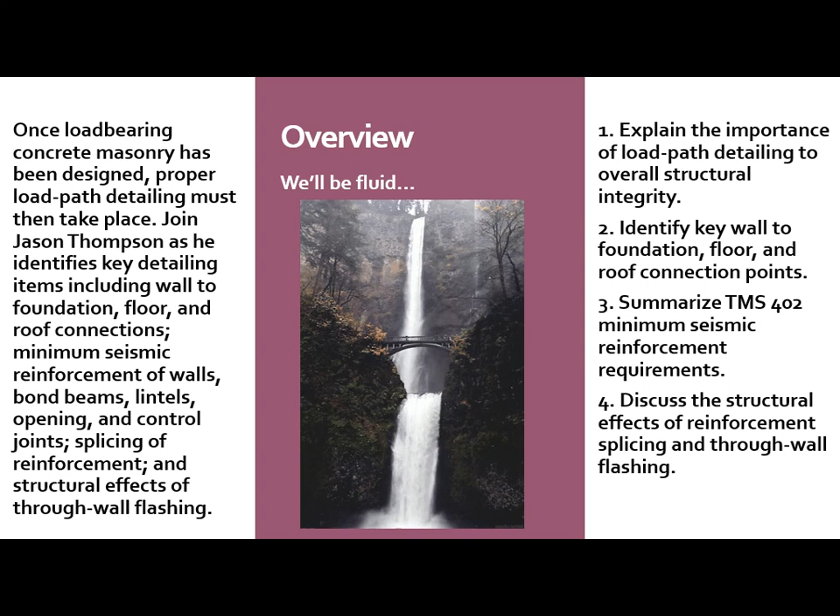And of course, you guys have handout slides and things of that nature. But even though we have a syllabus laid out in front of us, we're keeping things fluid and fairly flexible, because at the end of the day, making sure you guys walk away with the information you need is always the most important task of the day.

So if you do have questions, at any point, shout them out, or if you want, save them to the end like Mr. Albert -- we'll save some time at the end to tackle those questions as well. But don't be shy about raising your hand and asking a question. If it's a hard question, I'll defer to Daryl. If it's an answer I don't know, I'll give you the code word of 'it depends,' and we'll talk about it later.

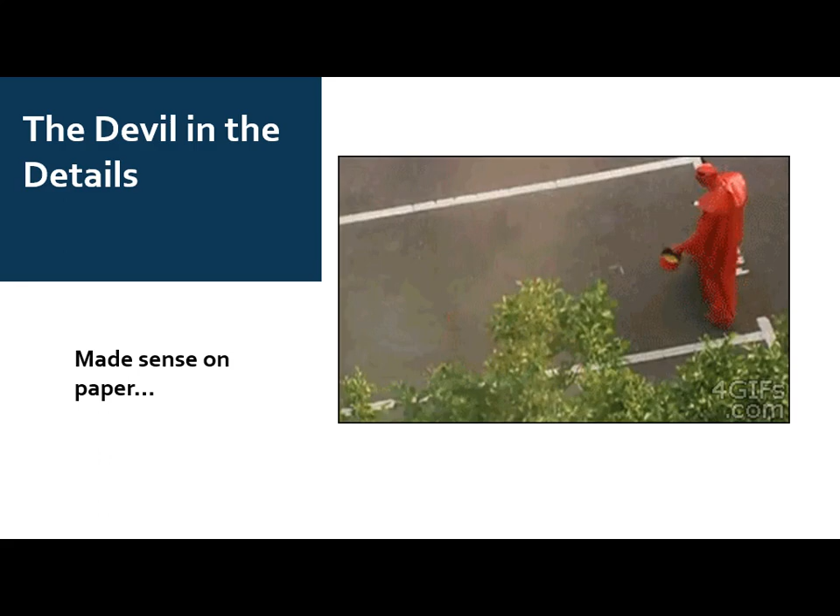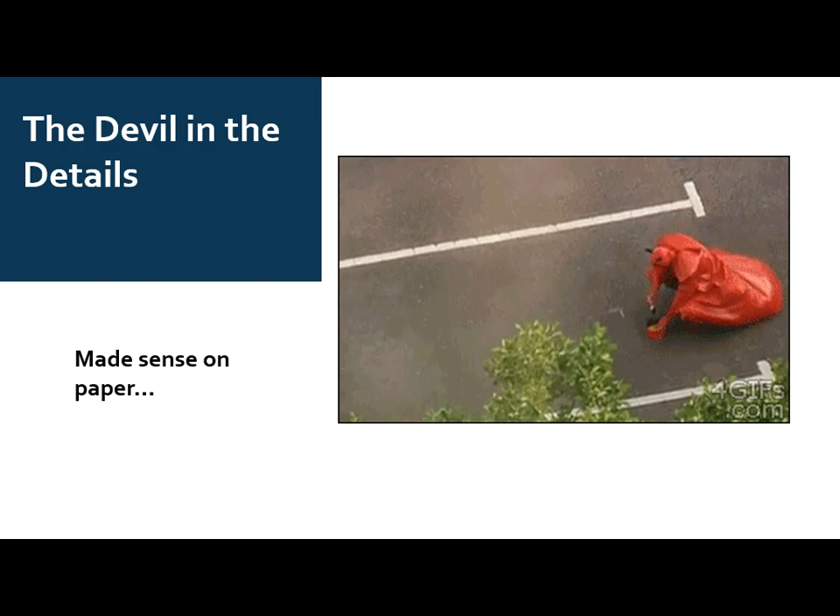Before we get into the specifics of details, I want to talk about bigger picture things. One of the biggest questions I tend to get is, you've got concrete block and concrete, what's the difference and why are there different codes? We'll drill into some of those nuanced details.

My background growing up on the West Coast, I started practicing and cut my teeth on the Uniform Building Code. For me, detailing practices for masonry were always centered around reinforcing steel, because it was UBC country, higher seismic. As a result, the concepts around unreinforced masonry were foreign to me until I moved to the East Coast and started seeing some of those requirements.

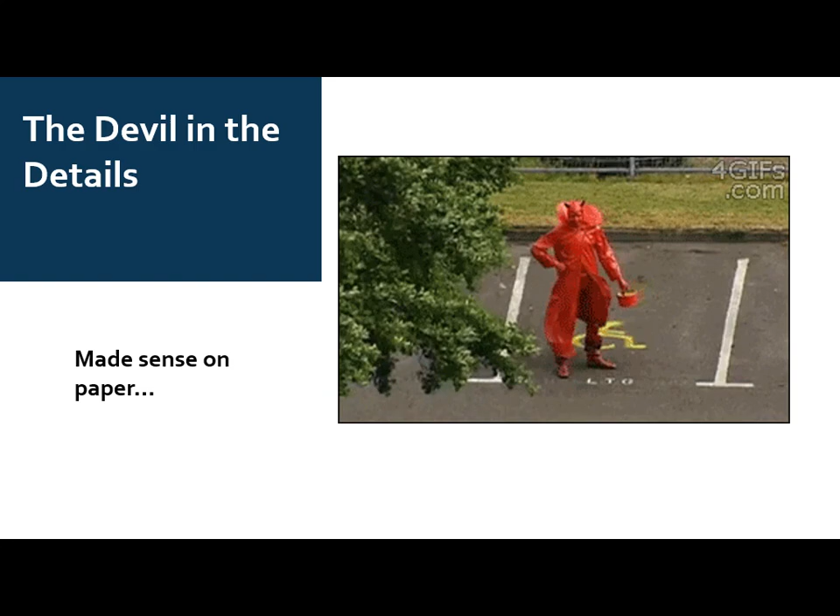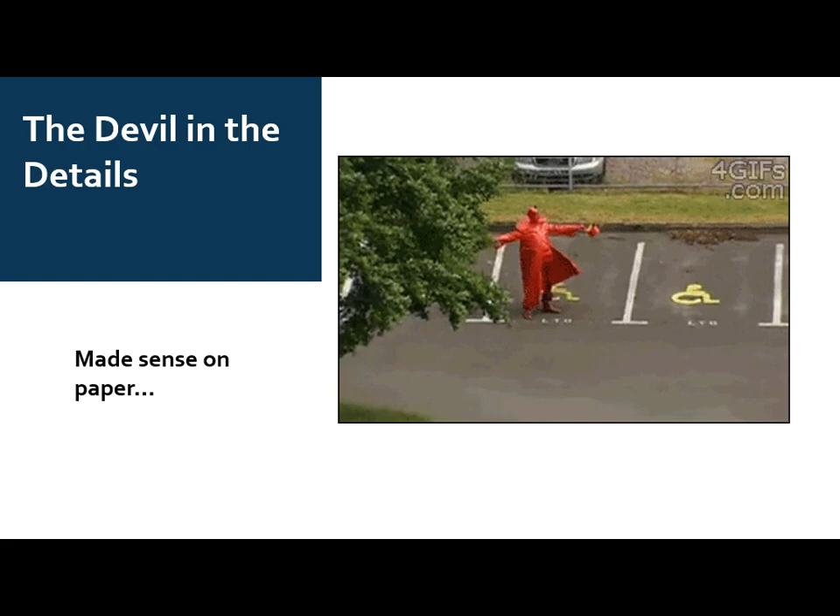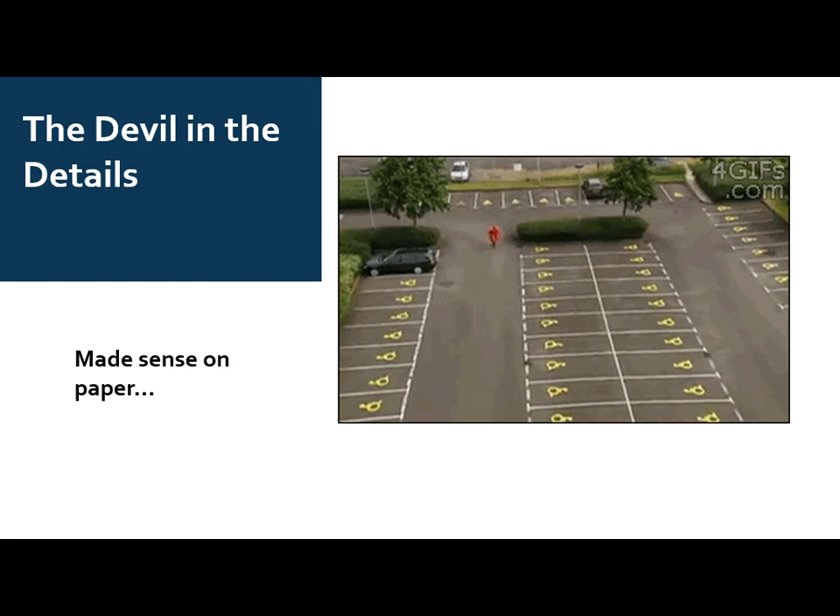When we look at it through the lens of concrete masonry versus concrete, they're both basically concrete, it's cement, aggregate, and water mixed together. The only real material difference is that all concrete block is dry cast, whereas pretty much everything under the reinforced concrete umbrella is wet cast. We could incorporate design provisions into a single standard addressing both, simply by introducing different coefficients or modifications for dry cast versus wet cast concrete. We understand that's true.

But when you look at it from the reinforcing detailing practices, they are a little different. When we're drafting design requirements for masonry, we know there are limitations in terms of practical and feasible construction practices that apply to masonry that don't necessarily apply to concrete. That's one of the underpinning reasons why we have different standards and detailing practices between masonry and concrete, because we just can't do some of the same types of details in concrete block that we can do with reinforced concrete.

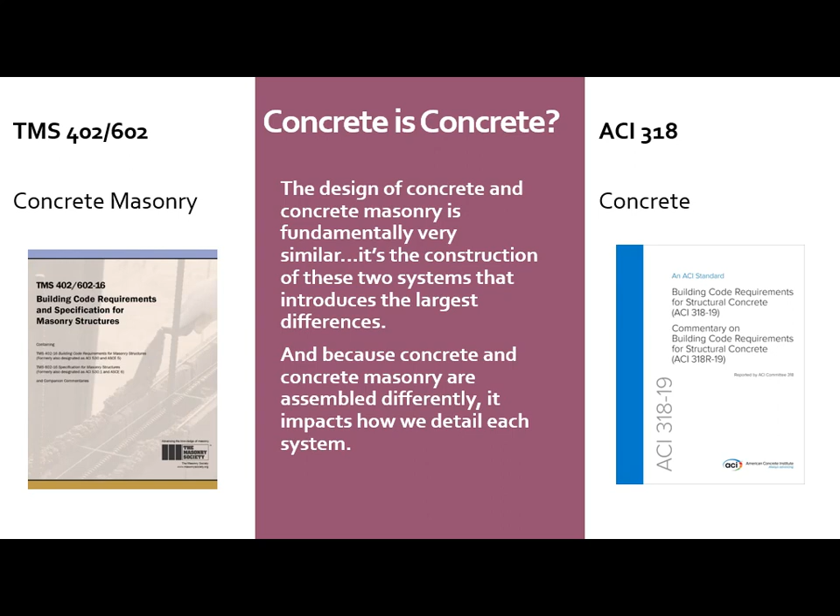So as we draft up the provisions now included in TMS 402, we have that implicitly buried in, acknowledging that yes, we could do certain things, but it's really hard to execute some of those types of details out in the field like you can for reinforced concrete. Because you're dealing with a concrete block, it's basically a stay-in-place form that's also a structural component of the overall assembly.

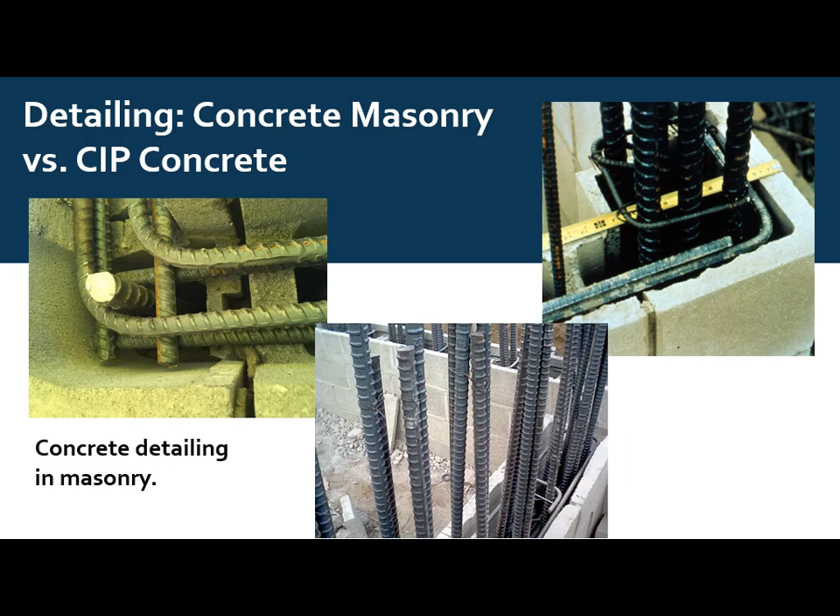Again, it's not that you can't do things like tying your vertical reinforcing steel within a masonry wall, it's just not always practical to do so. We work that into some of the implicit detailing requirements stipulated through TMS 402, as well as some industry recommendations.

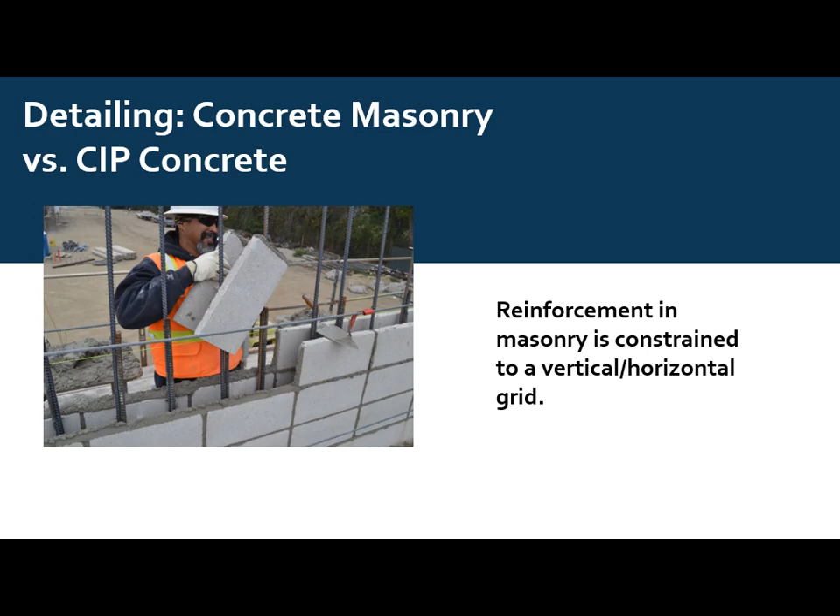I wanted to set that as grounding criteria as we look at some of these details. It's not to say you can't do things even better than what industry practices or TMS 402 would require. It's that there are limitations with masonry construction that you don't necessarily see with reinforced concrete, even though fundamentally they're the same material. We just put them together in a slightly different way, and they get detailed as such moving forward.

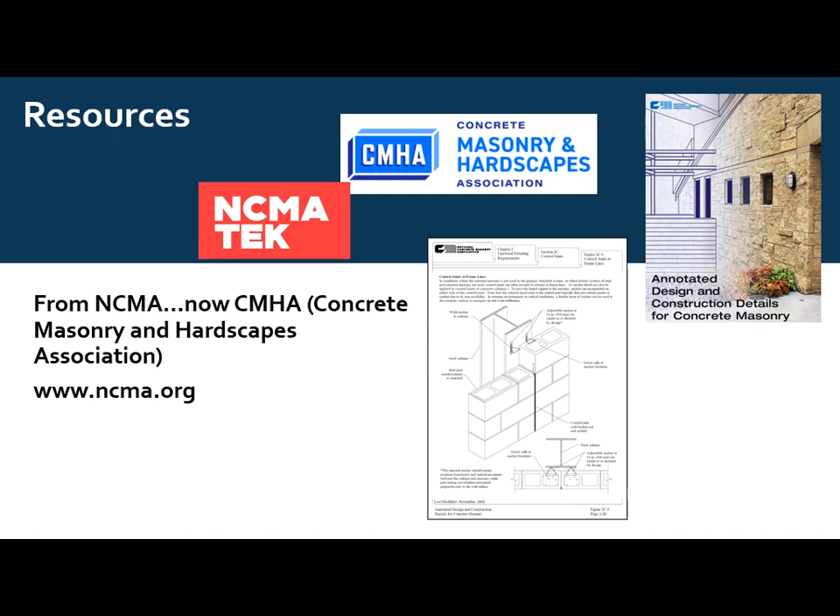In terms of detailing, the one I would probably say is the most comprehensive is their annotated design and construction details. This has hundreds and hundreds of CAD-based, vector-based drawings that you can download and apply. As with any of these details we're going to talk about, they're pretty high level. They don't get into very specific details on a project-by-project basis, because they're not intended to do those types of things.

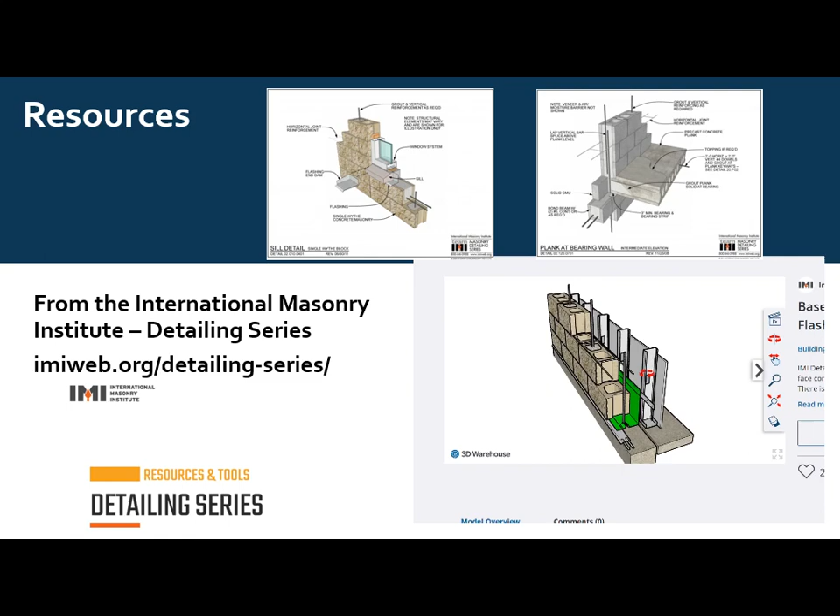The next organization is the International Masonry Institute. You guys may have heard of this group. I bring them up because their details are not vector or CAD based. They do SolidWorks, SketchUp types of things, which I find an advantage from an instructional or teaching perspective when working with younger engineers, because you can go in and look at three-dimensional drawings at lots of different angles. So if you're ever curious how to do a connection or how to meld two different types of materials together, you can rotate things around to look at it in different views, to get a gist of how to apply it to one of your specific details.

The third one, which you may not have heard of because it's north of us from Canada, is the Masonry Institute of British Columbia. They've got a big database very similar to what IMI has. They are all solids based, developed in SketchUp. The one thing I do like about what they have is their navigation tool.

The way they've put together their library of databases is they give you a building, and then places you can click on throughout that whole building, and it will pull up details appropriate to those, whether cross sections or details at roof floor levels, what have you. So it's a lot of the same types of details, but also a different way to interact with it. Depending on what you use in your offices, whether CAD based or Revit based, there are different types of resources out there.

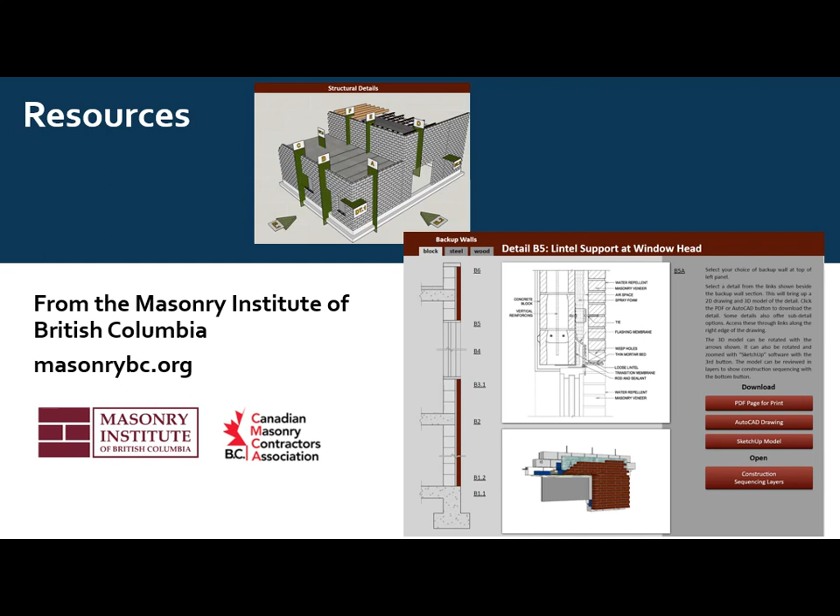Having said that, as we go through some of these things, I'm actually going to pull up some of their details and pick them apart as well. Recognizing that there's lots of different ways to do things, and some of the details out there as industry practice don't always address every little thing, some of those nuances are good examples for us to talk through this afternoon.

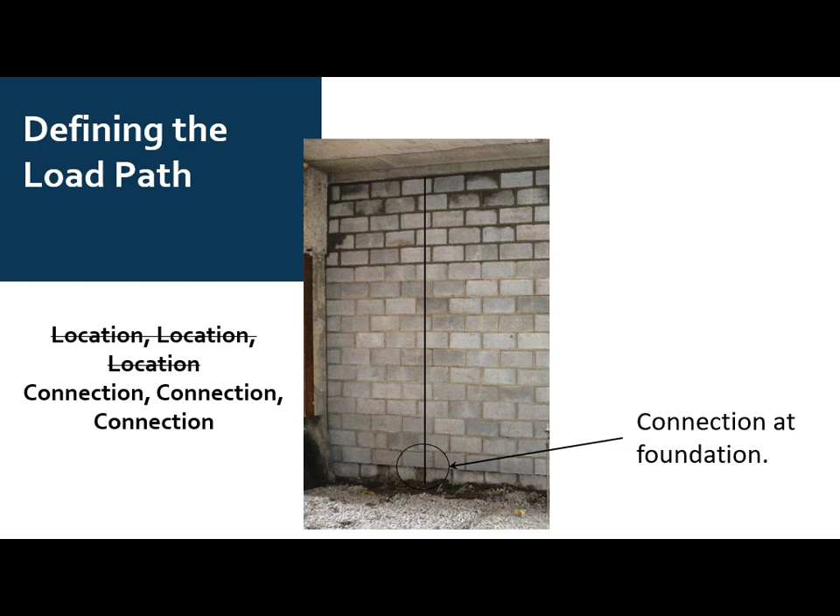So we all know the location. What I'm going to focus on is really the connection component of our load path as it applies to detailing our masonry structures. I'm going to lump it into a few different categories: that base component, that base connection where the masonry wall connects into the footer or foundation below; then work our way up the wall, looking at tolerance placement requirements for the reinforcing steel - not a lot there, but a couple of nuanced things to discuss; and finally, the connection at either the roof or floor level. These are the three areas we'll focus on over the next few slides as we look at maintaining that load path, ensuring our connections are stable, verified, everything else.

Starting with our base, the two primary things I'm going to talk about in terms of their implications on detailing is how we interface or connect to the footer itself. And because it's the base of the wall, the footer-to-wall tends to be that transition between trades - you got a concrete sub versus a mason sub installing the two. That tends to be one of those areas where you have lap splices, mechanical splices, or welded splices - some kind of splicing to maintain that tension tie within your masonry wall.

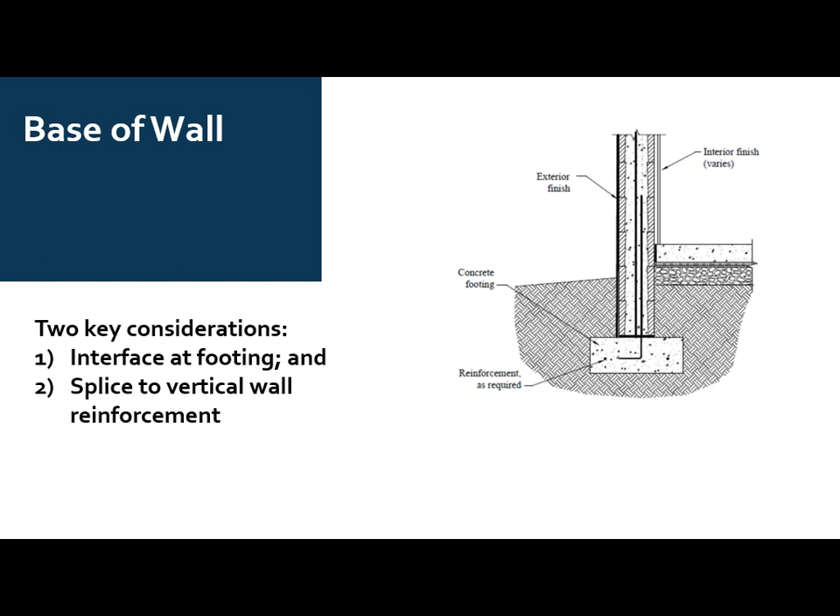Starting with that connection, that dowel at the base, a couple of key things that I tend to see - and this kind of gets back to, sometimes it just tends to be a trade coordination thing more than anything else. The concrete contractor installs the footer, the mason contractor comes in after the fact, and they have to work with the dowels that are existing.

One thing I do tend to see a fair amount is what contractors occasionally call wet sticking. They place the concrete, and come in after the fact to place the reinforcing steel. There's really no code, whether concrete or masonry, that allows for that type of construction practice. I get why it's easier to do, because once the concrete starts to stiffen up, you can drop a rebar in there and it kind of stays in the position you apply it.

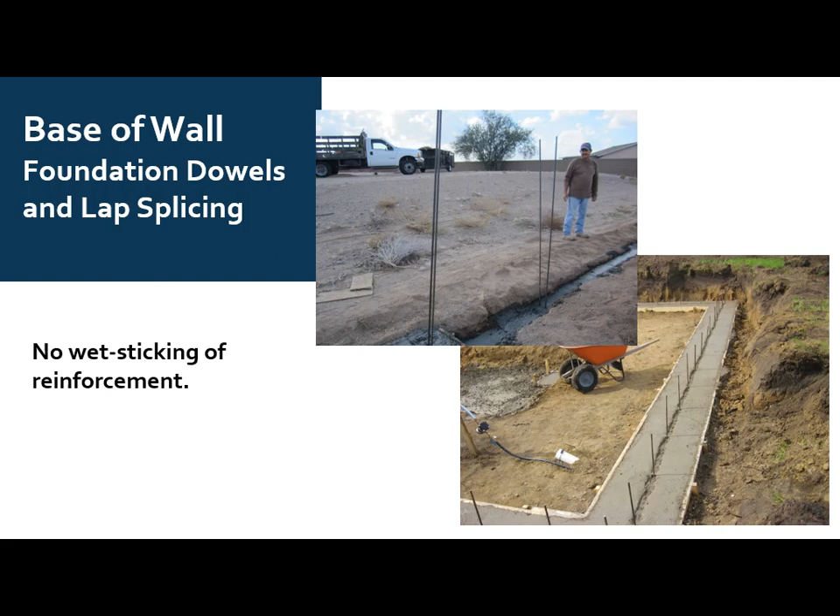We've got to maintain our cover distances around that footer steel, just like we do with the exposed above-grade wall. The bottom picture shows a bit more of that wet sticking. This was a situation where they came in after the fact, and all that toothing you see is where they placed the hook on the bar into the footer itself.

Placement tolerance is obviously another thing you have to worry about. A couple of extreme examples here: one I'd put into the 'I don't care' category, the other obviously had some formwork movement that ends up misaligning those dowels. We'll talk about some details at the end because this stuff does happen. When you run across these situations, TMS 402-602 for masonry does have allowances for how to realign things once they're set in place, specifically looking at dowels coming up out of a footer or foundation into the masonry wall.

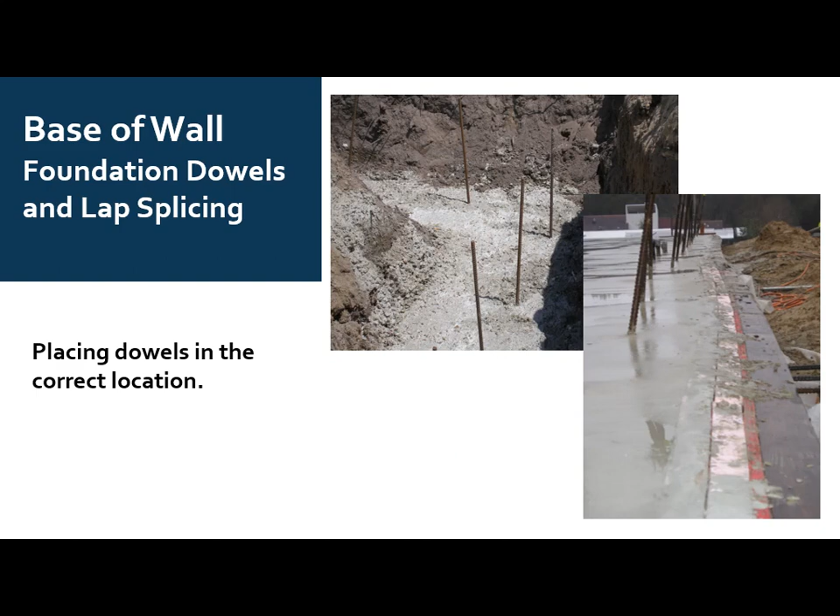With our load path, it obviously all starts with the foundation, that's where we begin, and we move all the way up to the top of the wall. So ensuring that connection is a critical part for us.

For splicing in general, we can lap splice, do mechanical splicing, or weld. For masonry construction, all three of these are permitted options in TMS 402-602. Welding's not all that common, mostly because of access issues. Since your steel is already inside the masonry wall, even if it hasn't been grouted, getting access to weld two rebars together tends to be complicated, but it is permitted. The only caveat is that if you weld reinforcing steel, you must use A706 rebar, because otherwise you can potentially embrittle the steel and lose strength or ductility with lower alloy steels.

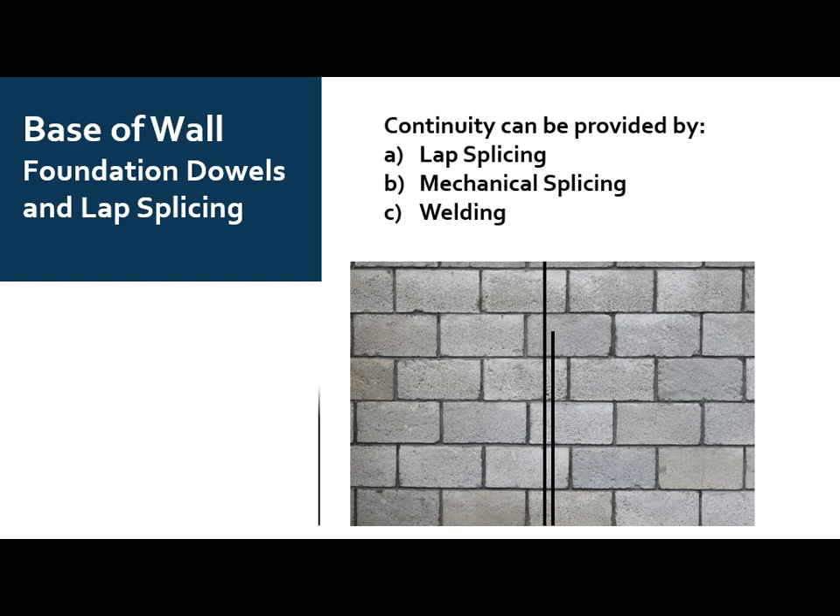Mechanical splices are certainly an option. They tend to be more expensive depending on how much steel you're reducing by removing the laps, though sometimes they're a good choice for reducing congestion within your cells. The caveat on mechanical splices is there are many different types, and just like concrete, masonry has various rebar splice types, some of which aren't necessarily a true structural mechanical connection. They will tie two bars together but may not develop the full yield strength, or 125% or 140% of the reinforcing steel strength. So pay attention to what type of mechanical splice you're using, since they're rated for different load transfer depending on their intended application. What I'm going to focus on more is the lap splicing side of the equation.

So we got a dowel that comes up out of the footer, and it's going to be lapped with the vertical bar in the wall.

Now, years and years ago, if you guys have been practicing long enough, TMS used to have a requirement that basically said for masonry, we lap our reinforcing bars 48 bar diameters. Really easy to apply. Everyone remembered it. It didn't change a whole lot depending upon all the variables that can come into a project.

But we also recognized it wasn't the best solution because it doesn't take into account things like strength of masonry. We know strength of masonry is going to influence the lap splice strength and performance. It doesn't take into account things like this K, this cover distance, which influences this lap strength and performance.

So long to short, we ended up with a new design equation for lap splices going back 15, 20 years now, that has, and I'm going to kind of refer to these gamma factors, and we're going to circle back to those, but think of these gamma factors as bar coefficients. As the bar size gets bigger, the lap splice has to go exponentially bigger.

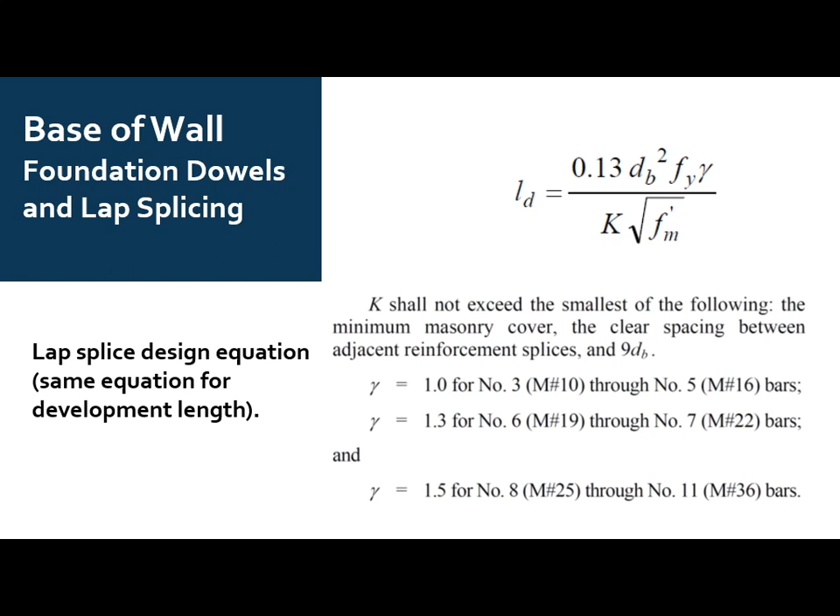We could do that with a more complicated equation, but it was a simpler way to just say, let's introduce these gamma factors. For small bars, gamma's 1. As our bar size gets larger and larger, that gamma gets larger and larger as well.

Now, relatively new is the introduction of this xi factor, this confinement factor for lap splice and development length. In essence, if you're familiar with detailing for concrete, it's a very similar type of detail. When we test these laps, there are lots of different ways you can load reinforced masonry or reinforced concrete. You can load it in flexure.

The worst case scenario is obviously we're loading our masonry elements in direct tension, right? So any lap goes into direct tension. And that's really what all the testing that predicated these details, these equations, was based upon.

What this confinement factor does is if we have any reinforcing steel running transverse to our laps, it will actually confine our lap and give us more strength, better performance as a result.

The one issue, without getting into the nuts and bolts of running through actual calculations, when people plug numbers into this equation for this confinement factor, the xi factor, what you'll quickly notice is it gets very, very small, very fast. So in other words, this number, even using conventional 5, 6, 7, 8 number bars, will go to zero very, very quickly. And a lot of times designers, when they first run through these equations, their question is, I must be doing something wrong, because all of a sudden my lap splice goes to zero very quickly.

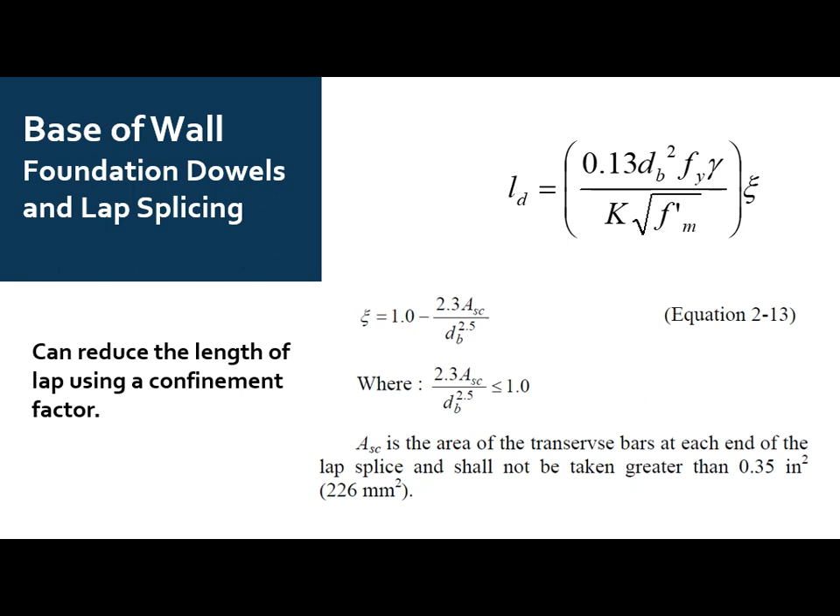And that's actually how it's intended to work. A little bit of confining steel goes a long, long way in terms of how these elements perform. The best way to visualize this is what this confinement steel does, this horizontal, or it could be vertical, it's just any steel that runs perpendicular to your lap.

So when we load these laps in tension, literally pulling on the laps so that we're trying to pull them apart, what we end up seeing is there's several different ways in which a lap splice could fail. We could literally neck down and yield and fracture the reinforcing steel. That's obviously not a masonry limitation, that's a steel limitation.

We could literally just pull the bar straight out of the grout, so what we're left with is just a smooth bored hole in the grout itself. Or more predominantly, we end up doing what's called a longitudinal split. So down the length of the lap, a crack will start to form and propagate out to the exterior surface of the masonry. And once that crack hits the exterior surface, there's no more grout confining or holding the lap splice, and so it splits apart, lets the lap go, and the lap releases. So at that point it fails.

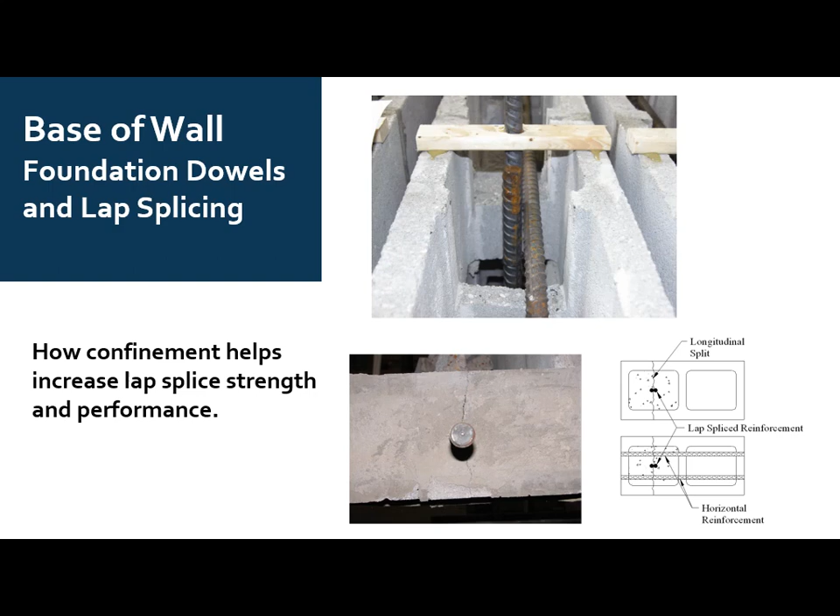What you see here on the bottom photo, that's actually looking directly down the axis of a lapped bar. So this is the end of a lapped bar, and you can kind of see these cracks just starting to form. This was a test specimen at impending failure, showing that mechanism that develops this longitudinal split. So long and short, with our confinement factor, we can add steel in. It can reduce our lap lengths, but as we'll talk about, there's pros and cons and a big caveat on where and how you want to actually use those details.

The reason is, as we'll talk about here in a second, there's actually a minimum lap length associated with this confining steel to ensure we don't have that pull-out failure mechanism. We don't want to have that smooth bore just left in the masonry grout after you load up the reinforcing steel.

The other sort of caveats or conditions on this, out of the TMS 402, is for this confining steel, we can add some, and a little bit goes a long ways, but there's a limitation. There's a cap on how much confining steel we can use, how much is effective. So there's a limitation on that horizontal bar in this picture. It can't be, at least in terms of the calculations, taken larger than 0.35 square inches. So if for whatever reason we had a number 9 bar in our horizontal bond beams, you could put the number 9 bar in there, but the area of steel you use in calculating the confinement effects can't exceed 0.35. That's really sort of research-based to say at some point you just sort of cap out on how effective that confining steel is.

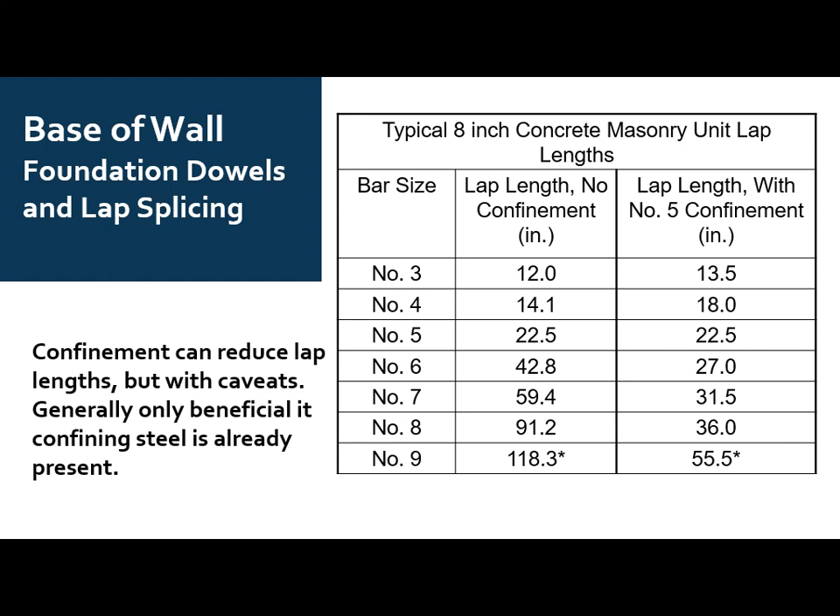And as I alluded to before when we looked at the numbers in that previous slide, our minimum lap length can't be less than 36 bar diameters, which is why we see things bump up for these small bars. There's that requirement of 36 db that kicks in for these small bars, because otherwise you'd end up with something even smaller than that. And what that 36 db is intended to preclude is that pull-out failure. We don't want a bond failure by having such a short lap length. It just basically debonds from the grout, and you're just left with a smooth bar or a smooth hole in the middle.

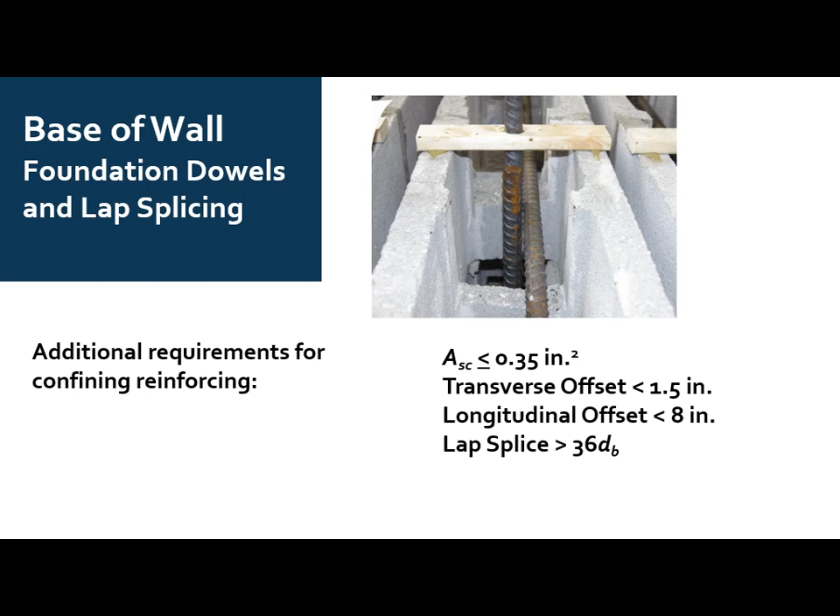So, oh yes, we have a Maxima, a gray vehicle blocking Lindbergh driveway. Anybody know that's your vehicle? Gray Maxima? All right, thank you. Speak up now, because it might not be out there when you go wrap up, right?

So when we start talking about lap splices, there's a couple of big caveats I kept alluding to. They do help, especially when you've got big bars that you're lapping. But my general recommendation is to only use them if you've already got the bond beams in your wall. If you crunch the numbers, adding extra horizontal steel just to reduce your lap lengths a little doesn't help much. You'd end up using more horizontal steel than what you save on lap splices in the long term, and they become more complicated to construct.

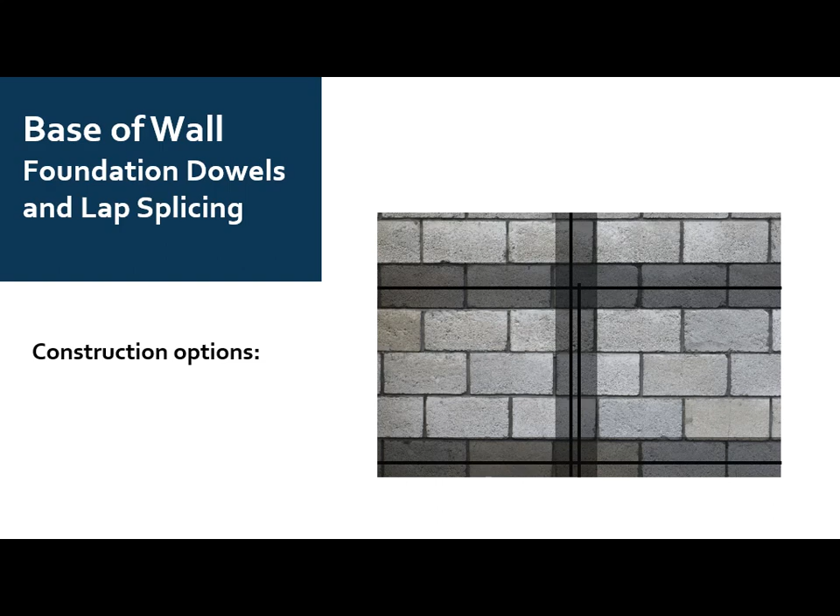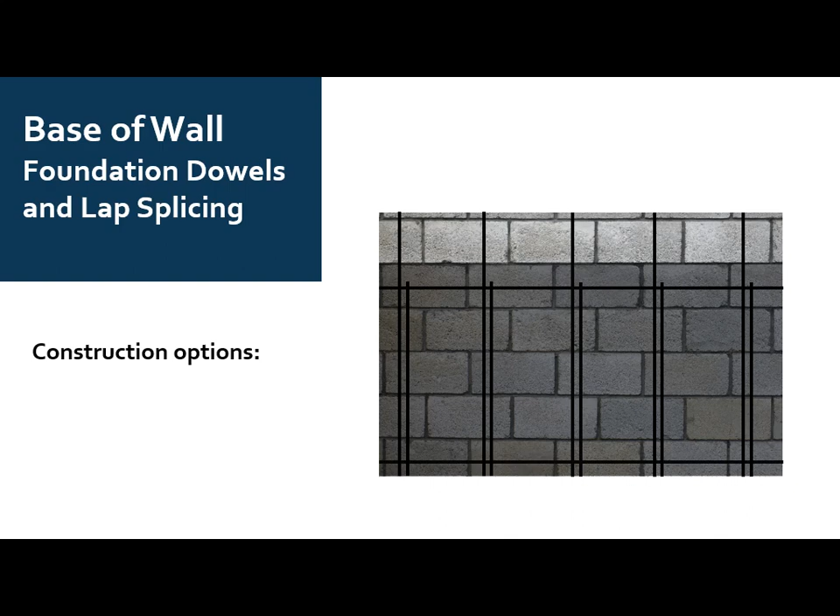Now if you do have something that's going to be likely solid grouted, so either your vertical steel is very closely spaced together and you're going to end up solid grouting anyways, then you might want to look at incorporating those horizontal bond beams if it makes sense to reduce those lap splices, because you're just going to end up solid grouting everything anyway. So it depends on what types of applications, whether you're solid grouted, partially grouted, whether that horizontal steel in the bond beams is already there. If you've got a special reinforced shear wall with bond beams every 4 feet regardless, you might as well take advantage of them.

So having said all that, I'm going to shift gears a little bit and talk about alternatives to all those types of things. One of the things we're starting to see more and more across the country is just different unit configurations.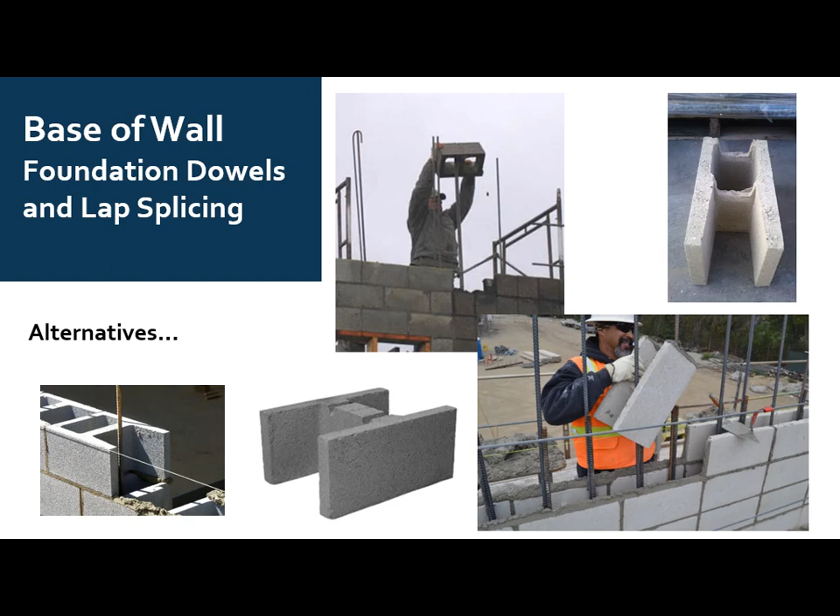So there's actually some other benefits of reducing the number of webs, because you reduce the thermal bridging. That gives you higher R values. So there's secondary effects associated with it.

I've got it focusing on the structural side and the detailing side of things. One of the benefits I really like about these reduced web units is you remove one of the webs, you open up the inside of that wall considerably.

So what you see here is a couple different wall assemblies that just have the outside face shell removed. The one on the upper right is a typical 3-web, 2-cell unit. The one on the lower left is a 2-web unit. We've just taken one of those webs out, but you can see how much more it opens things up. From an engineering perspective, that gives me a lot more confidence in terms of when I detail and put steel in it. It's still up to the mason contractor to ensure that the grout gets placed and consolidated correctly, and having that open area to be able to do that is certainly more advantageous.

There's also other things, Diana reminded me, there's different types of format units being introduced. Everything I've got up here is the standard 8x8x16. But there's other unit configurations being introduced, like the 8x8x32, twice as long. It does require mechanically assisted installation devices, but a lot of that technology is being introduced more into the field. All these details we're talking about are really independent of the unit configuration. You don't design these units any differently or detail them any differently. They're just more to facilitate the construction end of the equation.

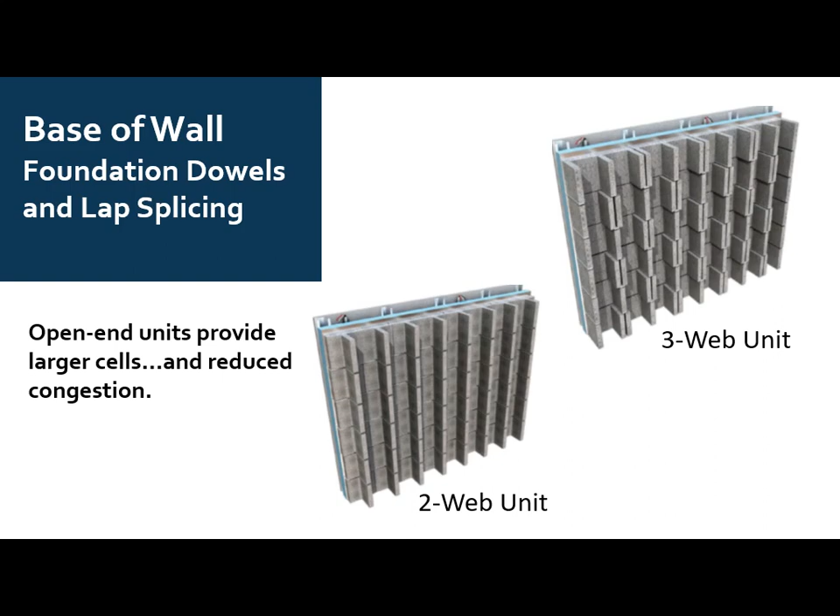So staying at the base of our wall, and if you guys have questions, stop me, otherwise I'll just keep going. I'm going to start off by saying these are bad details, okay? So don't take pictures, don't go back and try to implement these details, okay?

But I had to go digging around. You guys may have seen these before. These are actually out of some NCMA tech notes, and if you looked online hard enough, you could probably still find them out there. But they illustrate the example we're going to talk about next at the base of our walls.

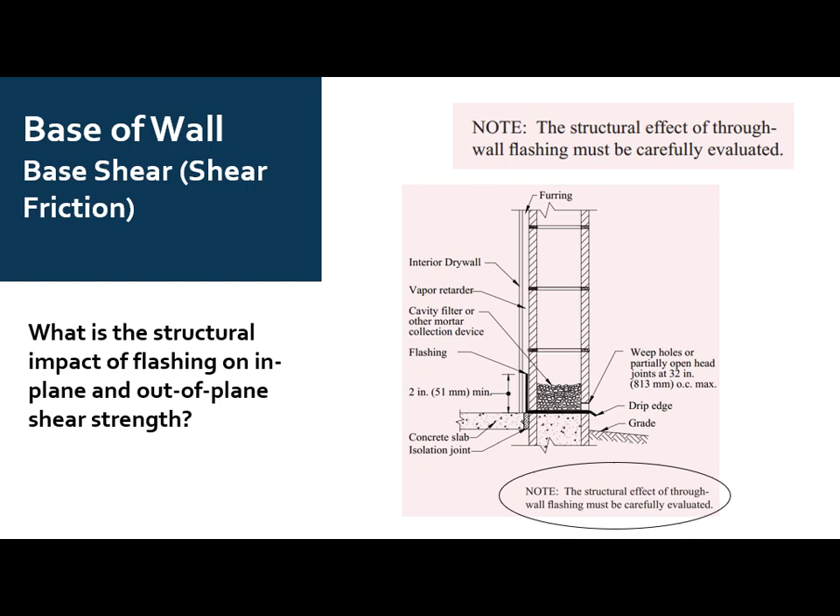Which is, when we incorporate flashing at the base of our walls, what does that do to us structurally? We're relying upon some sort of stress transfer between the upper wall and the base, and if we don't have anything crossing that flashing, we've functionally just put base isolation into our walls to some degree. When you look at some of these old details from NCMA, they have these notes saying, wow, you got to check this out, because there wasn't a whole lot of research or other options out there to definitively give guidance as to how to address this type of issue. We kind of suspected there was something going on, but we didn't have good data to say here's how you actually go about fixing this issue where you've got flashing at the base of the wall.

Today, we do. So these are some old NCMA details that tried to work around really complicated ways of maintaining some sort of load path across these flashing locations. It's kind of hard to see, but there's these stepped flashings, and you have these weird joints, and I'm sure the mason contractors love building these types of things. Long story short, this was the stopgap solution until some research was available that said how do we detail or design around this confidently, knowing that we still need to maintain our load path.

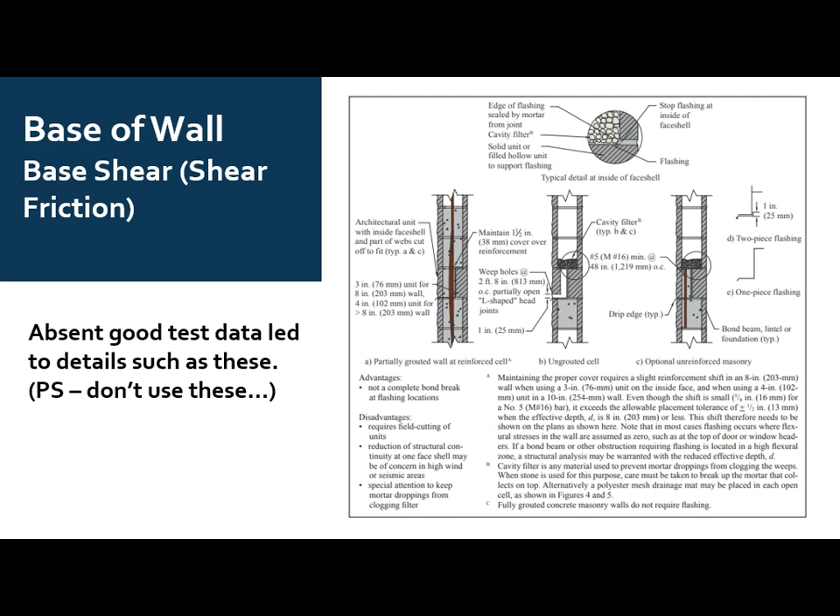Back in the 2016 edition of TMS 402, going back a couple cycles now, they introduced what we refer to as shear friction provisions. So regardless of what that interface material is, there are provisions now for how to detail, design, or check to make sure you've got enough shear transfer mechanism crossing that flashing plane. What you see here is really based upon two different coefficients. I'll talk a little about these equations, but essentially there's a frictional coefficient included. It's 1 if it's masonry on concrete, basically, and 0.7 for pretty much everything else. That 'pretty much everything else' is intentionally intended to be pretty much everything else, recognizing that there's lots of different types of flashing.

There's metal flashings, EPDMs, self-sticks, and all those different types of flashings. This number we recognize as being a pretty conservative low value because we want it to apply to kind of everything. There could be some scenarios where it should be 0.8 or 0.9, but at this point we're basically saying it's 0.7 for pretty much everything else.

Now with shear walls, let's say we're checking the in-plane strength of our shear walls. There's a couple different checks depending upon this trigger, M over VD, which you can think of as M our overturning moment, V our shear, D the length of our shear wall, as an indirect measurement of the squatness of our shear wall. So as our shear walls get very tall and thin, but not very long, they're going to be flexurally dominated. If our shear walls are short and long, they're going to be shear dominated. For short squat walls, we've got a shear dominated mechanism controlled by this equation. For tall shear walls that are not very long, we end up with a flexurally dominated mechanism. And we do a linear interpolation between the two. So long and short, we now have a design check.

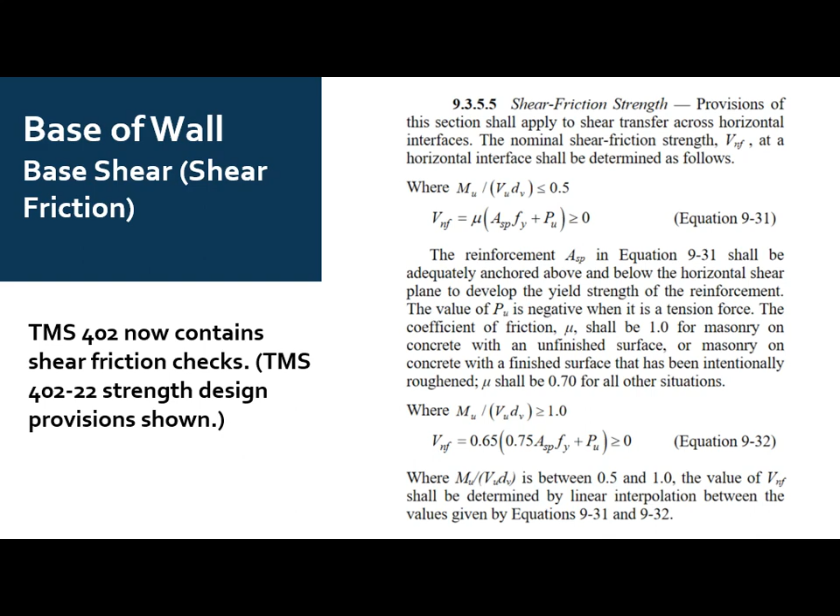One other final thing, as I alluded to before, with foundation dowels, if they don't get placed exactly right, there are a couple of options in TMS 602 that say you can bend and move things around a little bit. So if you've got a dowel that doesn't perfectly align with the vertical reinforcing bar or the cell intended to be vertically reinforced and grouted, you can bend that bar over an inch for every 6 inches of height. There's also an option in 602 for what's called a non-contact lap splice, so physically those bars don't have to be in contact with one another. They can even be in adjacent cells, just not more than 8 inches apart.

This is sort of indirectly related to a question I get occasionally: do you have to wire tie laps together? When the contractor is installing lap splices, do they have to be wire tied? The short answer is, if they have to be wire tied to maintain position for tolerance purposes, sure, wire tie them. The wire tie doesn't actually contribute much to the strength whatsoever. We've tested with and without the wire ties, and it doesn't do a whole lot in terms of adding any additional contribution to the strength or performance of the lap splice.

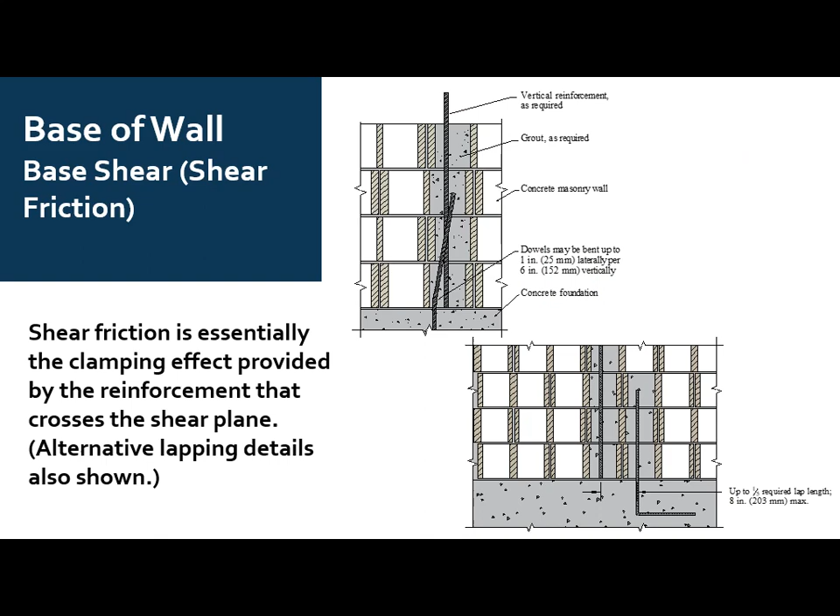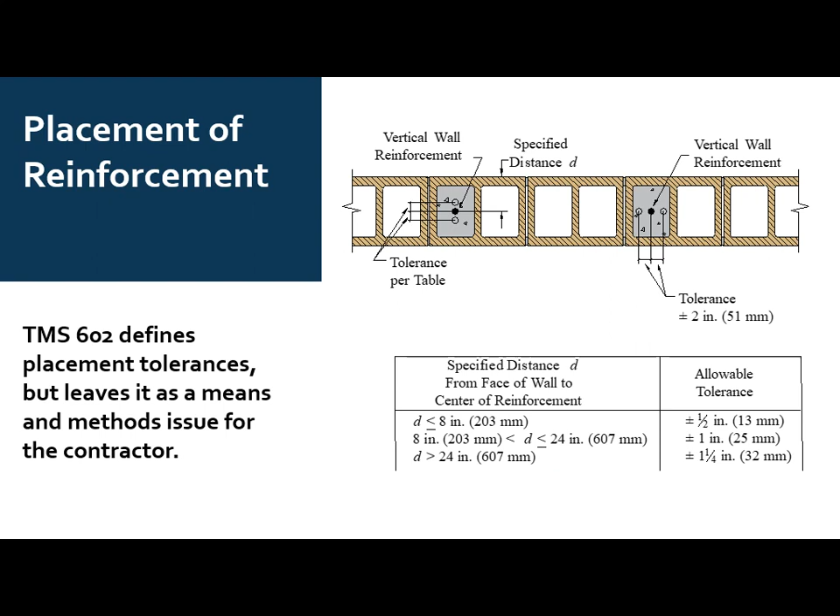Moving up our wall, again the placement stuff, this one's pretty straightforward. There are tolerance requirements for where we place the reinforcing steel, all spelled out within TMS 602. What I really want to talk about is how do we accomplish these tolerances. TMS essentially says here's the tolerances, we don't tell you how to do it. It's kind of deemed to be a means and methods issue through the lens of TMS.

In the past, codes like the Uniform Building Code stipulated you have to use bar positioners every so often over the height of the wall. There's actually a debate on both sides of the fence on the benefits of bar positioners. Certainly they do hold the bar in the correct position, but they also create issues with congestion and potential hang-ups for the grout as you place them. You can talk to different engineers and architects and they have opinions on both sides, which is probably part of why TMS has said, look, we'll leave this up to a means and methods issue. So as a specifier, if you want to include bar positioners because they make you feel comfortable, I think that's fine. If you don't, leave it up to the contractor to figure out the means and methods for themselves.

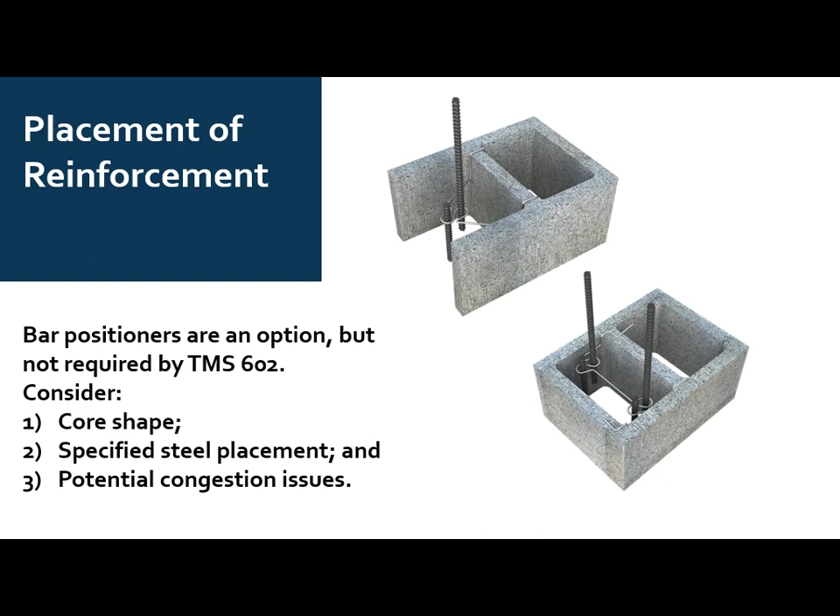The other thing with bar positioners is there are so many different types of bar positioners out there, and so many different types of core configurations for block. They're not always compatible with one another, so that's something else the mason contractor should be sorting through and figuring out.

Moving on up our wall, now we're at our connection at the floor, the roof level. We'll start with the generic stuff of anchors. TMS 402-602 addresses embedded anchors, so bent bars and headed bars are addressed within TMS 402 because they're generic, non-proprietary.

If you do a fair amount of designing anchors embedded in masonry, there's a free spreadsheet you can download through the NCMA website. It has screenshots where the blue cells are inputs, and at the bottom it does all the calculations for you, depending on whether you're doing a ledger connection or top of wall connection.

Now, I personally gravitate a little more towards post-installed anchors, at least for certain types of connections. If I'm doing a wood ledger to a wall, as long as I can get the strength I need out of those post-installed anchors, I lean toward them, because with embedded anchors, the mason has to install them as they go, in the exact right spot, and we all know as-builts and specifieds aren't always the same.

So the post-installs give you a lot more flexibility. Once things are up, they can come in and drill holes, whether you're using wedge, screw, helical, or epoxy anchors. They're proprietary, so a bit more expensive, but you tend to save on labor afterward, and you don't have to readjust things if a bolt gets embedded in the wrong spot and needs to move down the road.

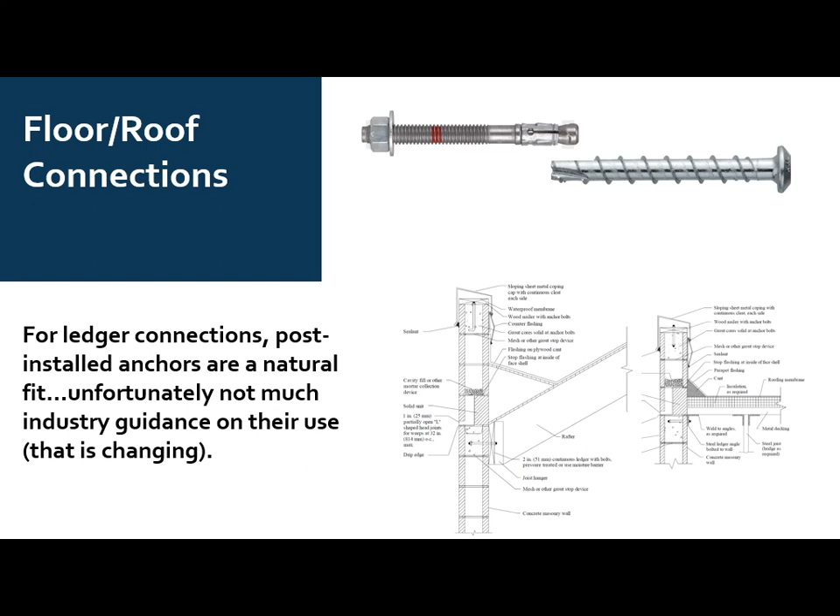Now, they don't work for everything, obviously, but they are a fairly good option.

One thing I wanted to mention, not shown here, with embedded anchors, TMS 402 has two basic options. There's headed, which is typically A307 steel, or bent bar, which is typically A36 steel.

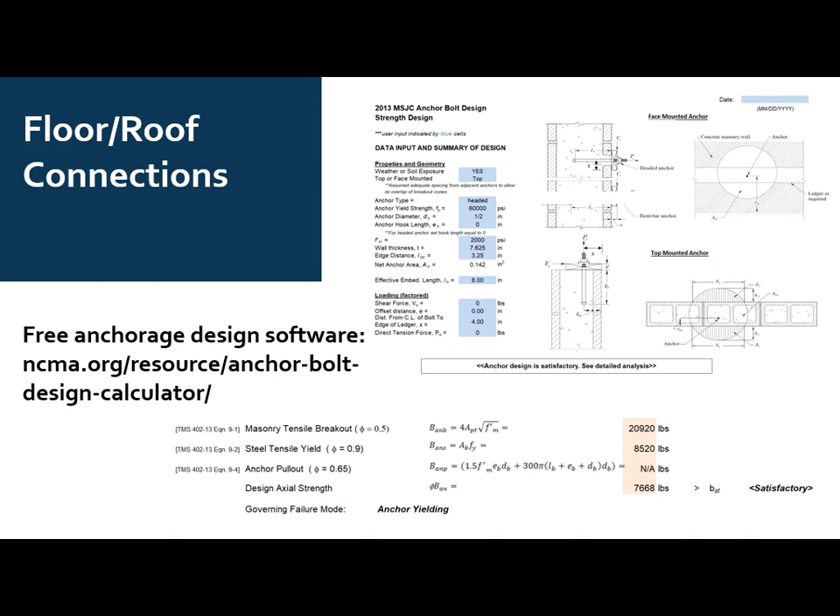If you ever run the numbers, I personally stay away from A36 steel. It's not a bad steel, it's not faulty, it's just a low strength steel. For the exact same anchor size and embedment, you get almost twice the strength with a headed bar versus a bent bar. So if you're looking to economize on strength and performance, headed bars tend to be the better option.

So this is where I'm going to pull up some of those details I referred to earlier in the resources section, and talk about specifics associated with those that aren't problematic, just something to consider as you're putting together these details in practice.

The first one is looking at how we do the bearing connection of a plank to a masonry wall. Most of the details you'll see out there have the plank bear on a portion of the wall, with a SOAP or a half unit or solid unit on the exterior to maintain aesthetic continuity if needed. There's still a gap where the vertical reinforcing steel can be continuous and grout can get down past it. It all works out great.

The detail I want to point out is really the plank or slab height. If you've got an 8-inch plank, it works nicely with an 8-inch tall block. If you've got a 10-inch plank, you end up having to notch out some of these units to get everything to fit. All doable, but just something to take into consideration.

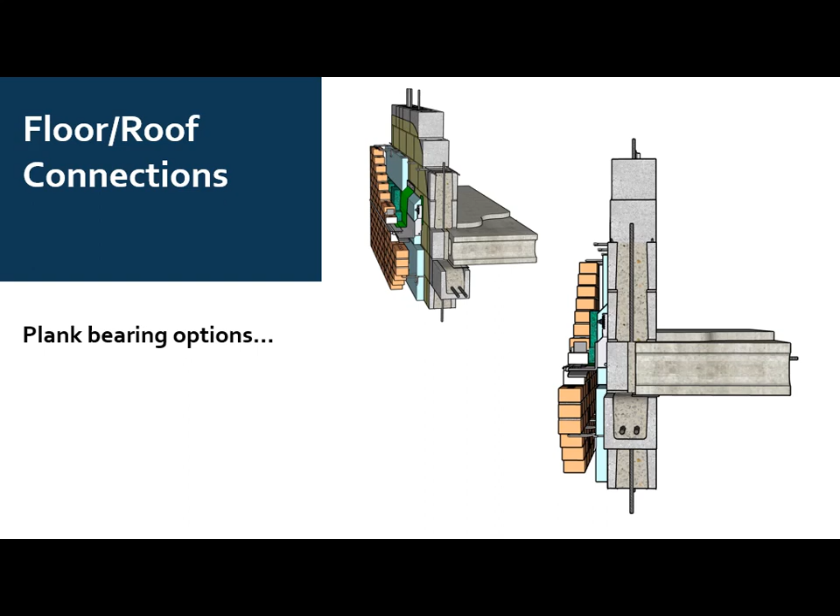Masons are kind of familiar with how to do this. The one that's a little bit more problematic is on the non-bearing side of this detail. This is an issue where I see them drawn, and they look great when they're drawn. They fit exactly into that course in that masonry wall.

But we know that planks oftentimes have camber to them, so where you are at elevation on the ends is not where you are in elevation in the middle. This type of detail, I tend to say, is hard to accomplish, may not be the option for the non-bearing side of your planks, unless maybe you got a really shallow plank, a 6-inch plank or something like that, where you can work with that camber. But these types of details tend to work a little bit better if you got a ledger or something else of that nature.

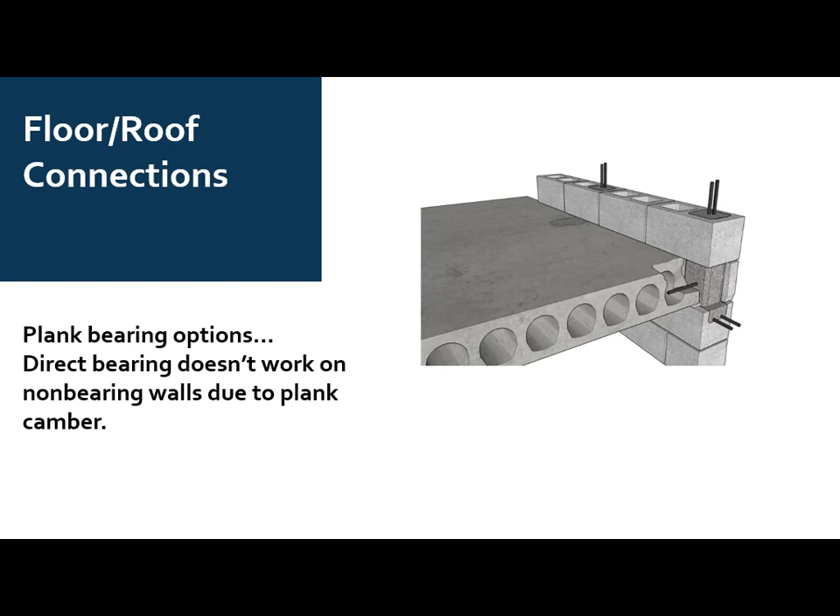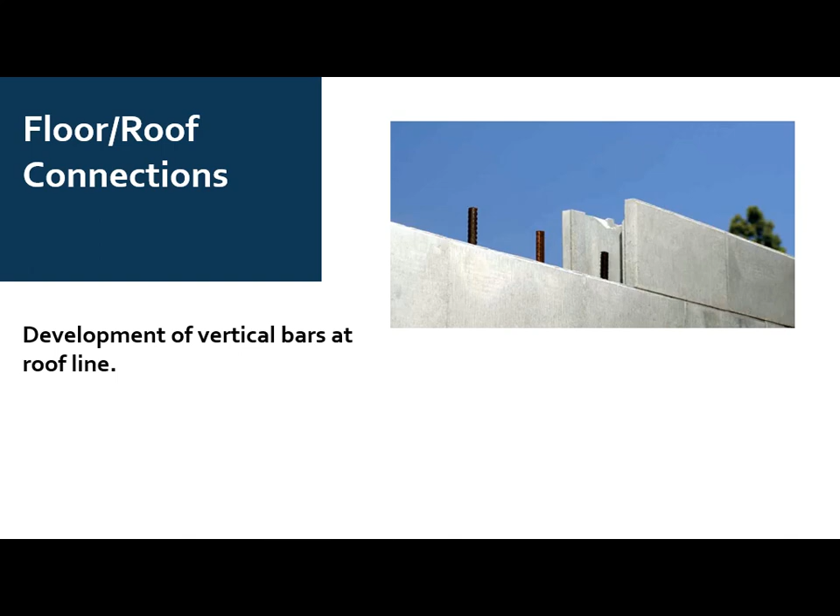Kind of moving or staying at our top of wall, we're connecting again to the roof or the floor line, is how we develop that bar. A lot of that lap splicing that we talked about at the base of the wall is all to be able to develop the full strength of the reinforcing steel that we put into the masonry. We want to be able to accomplish the exact same thing at the top of the wall. So we've got dowels or vertical bars that come up through the wall. How do we tie that into our roof so any wind loads or gravity loads that come in from the roof get transferred appropriately into our masonry and down through to the foundation?

So that standard hook, there's lots of different standard hooks. This is shown as a 90-degree standard hook. Sometimes it's the candy canes, 180 degree, just kind of hooks over that top horizontal bar. But this isn't going to develop, those types of details won't develop our full strength of our reinforcing steel. So the point with this one is standard hooks hook the reinforcing steel, but they don't develop the reinforcing steel. So you don't get the yield strength that you need out of that reinforcing steel.

In order to do that, you actually have to extend that hook out, and it depends, length depends upon the diameter of the bar, a fair amount, maybe 12, 14 inches, to get that full development length, to get the full strength of that reinforcing steel. So any load that comes in, whether it's coming in from the roof, the floor above, down, or up, if we got direct uplift from wind on our roof, for example, we can now fully develop that reinforcing steel.

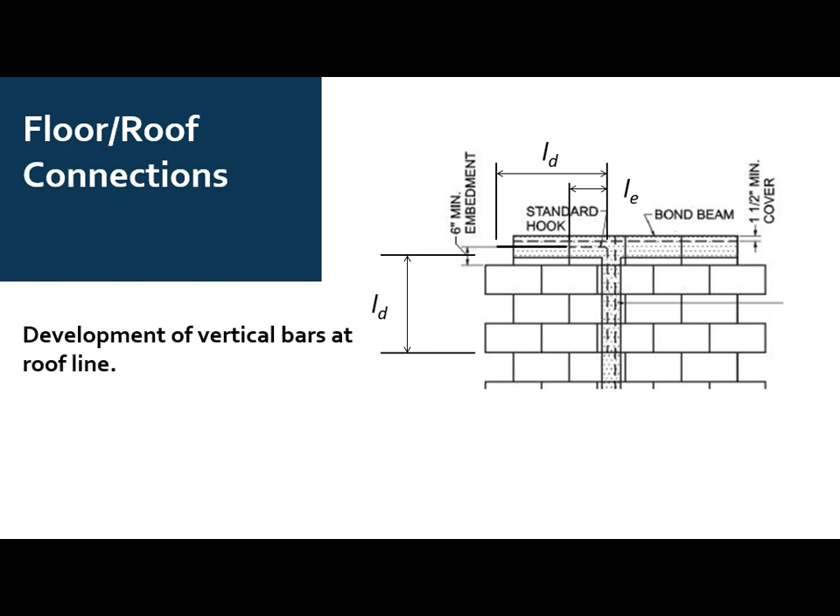Now the rub with these types of details is, as you start to put longer and more hooks in that top course, you're eventually going to start running out of room. I've seen lots of details where you got vertical steel at 16 inches on center, and every one of those bars has a hook, one of those 90-degree hooks on it, and they're just starting to stack up in that top cell. And then, of course, you run into things like this where there's lots of other stuff we're trying to cram into those cells. Pretty soon that electrical conduit's the only thing holding things together for us, and that doesn't work so well.

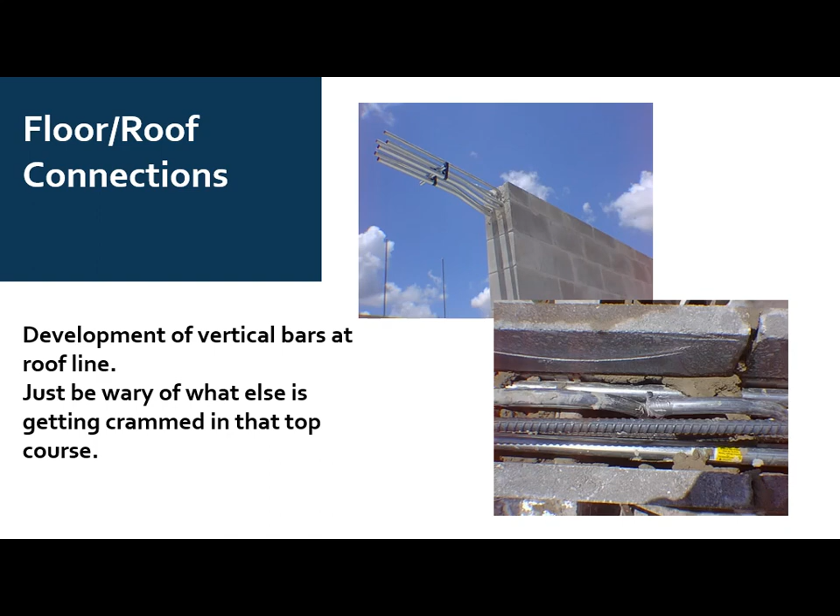So in this particular case, what I'd suggest looking at is, instead of hooking the 90 degree, and instead of just doing a little candy cane that just barely hooks over the top vertical steel, you can do some of these hairpins. It gets a lot of the steel out of that top course, but the length of these hairpins are sufficient that you can get the full development out of the reinforcing steel.

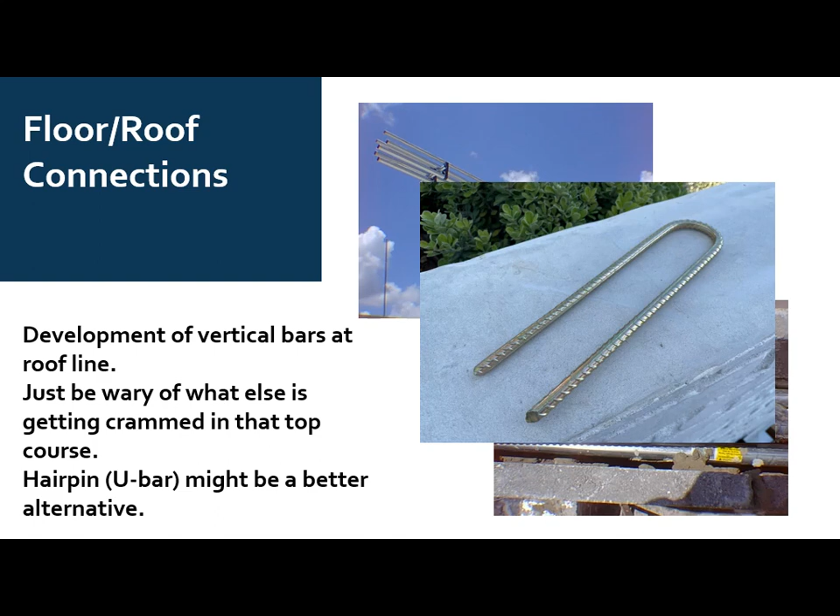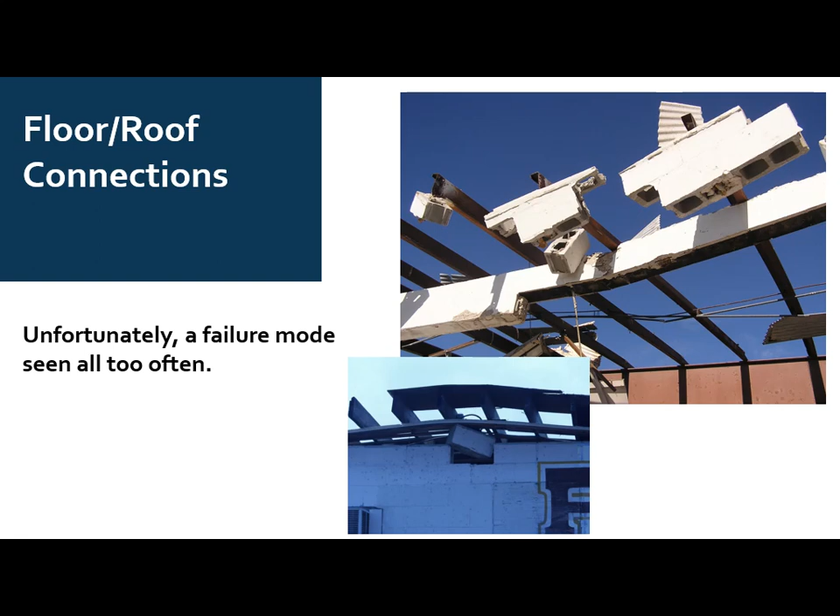Because otherwise, and again, these are some photos from buildings that were constructed back in the 40s and 50s that, obviously they had a good connection between the roof and that top block, but there wasn't the load path that actually kind of continued all the way down.

The last one of these connection issues has nothing to do with the structural side. It's one I'm seeing more and more of, so I wanted to raise it here. This one's actually completely unrelated to loads or structure - it's related to energy efficiency.

We're seeing the fat wall syndrome, right? We're trying to shove more insulation into our walls, so our walls are getting thicker and thicker. Architecturally, we're starting to see a lot of windows now attached to veneers just because of the size and thickness of walls. Veneers are not structural - there's nothing about a veneer that's able to carry the load from that window into the veneer. You could go around and come up with a detail, but the prescriptive detailing requirements for veneers in TMS and the IBC or IRC do not account for this type of additional load getting dumped into the veneer. Basically, veneers are, from a structural standpoint, our paint - they're just really, really thick paint. We're assuming that they carry nothing but their own weight.

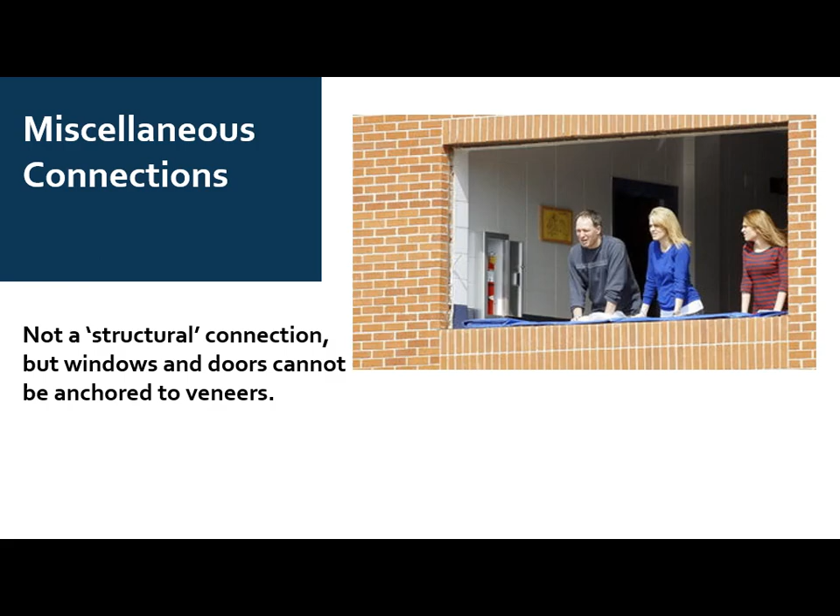Probably the least favorite part of this - I'm going to start with the taboo thing. You guys won't like these next couple slides, architects and engineers, because this is one of those things that causes some grief out in the field.

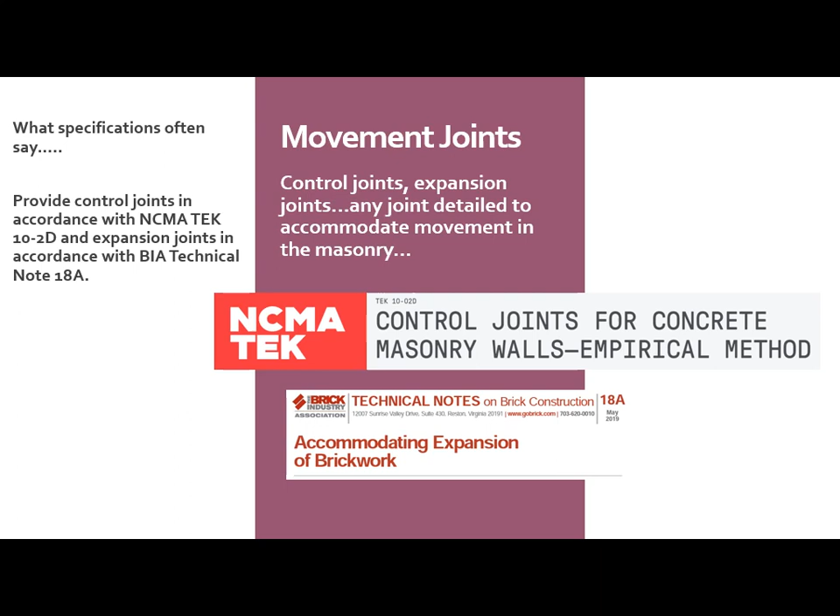When I typically see project specs for control joints, their spacing and location, I mostly see a statement like: provide control joints in accordance with a reference, either NCMA TEK if it's concrete block, or a BIA Tech note if it's brick. There are recommendations out there, and they're fairly straightforward and easy to follow, especially the empirical stuff - it says if you're this tall on your wall, you need control joints so many feet apart.

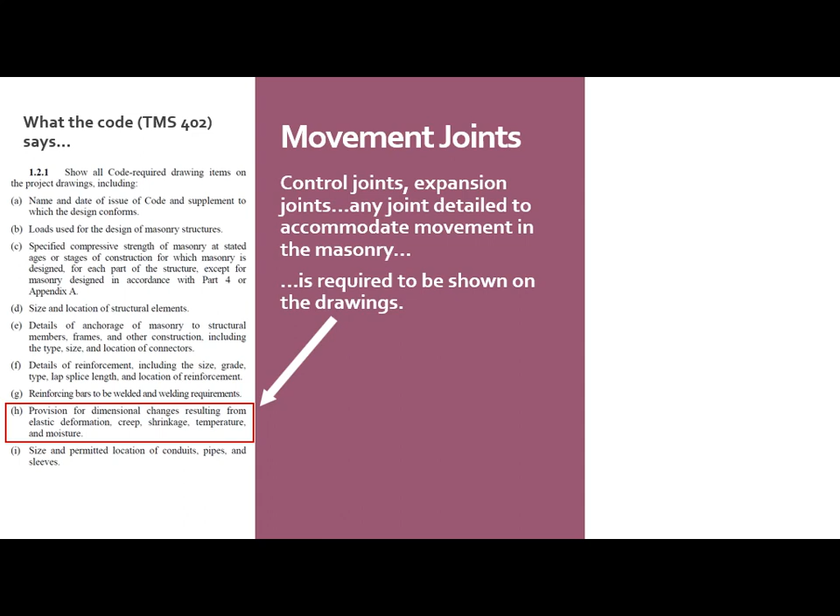Here's the rub on that one - TMS actually stipulates that these control joint details be shown on project drawings. You often wonder, well, why is that? It's a shrinkage-related thing, it's aesthetics, isn't really all that important. The primary reason is alluded to in the commentary, but to give you a better idea, this is a shear wall.

I took a 12-foot tall wall that's 100-foot long and ran it through 5 different scenarios with different types of control joint spacing. Essentially, with our control joints, we're incorporating discontinuities in the horizontal length of our shear wall. So we're changing how that shear wall is going to react to in-plane load, and that's going to give us a different strength.

Starting at the top, our wall is 100-foot long with no control joints - we can calculate, based upon these parameter inputs, the in-plane shear strength per TMS 402. If we put in control joints per NCMA TEK, for example, we start dropping, and we drop more and more the more control joints we put in. This is the primary reason TMS 402 says we want these control joints shown on the drawing, so it's a recognition that the designer took into account where they are and how they impact the in-plane strength of our structures.

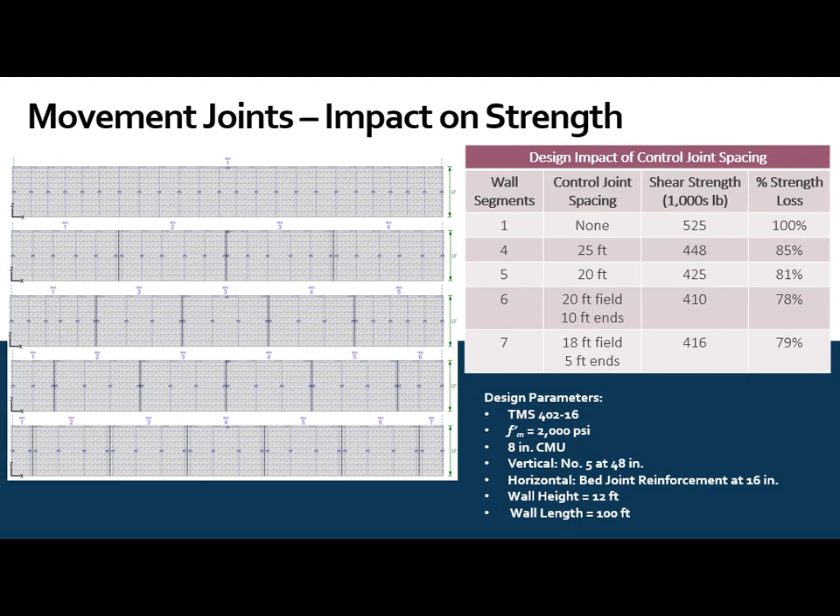You'll see one nuance at the very bottom, where the strength actually went up relative to what it had before, even though we had more control joints. This illustrates that there are different mechanisms that control our in-plane shear strength - we talked about shear-dominated versus flexurally-dominated before. As our shear walls become shorter in length, their failure mechanisms start to change, so we actually get different strengths out of them as a result. This isn't a typo - it actually does increase strength a little bit by putting in more control joints.

And of course, things get even more complicated if we start putting in openings and everything else.

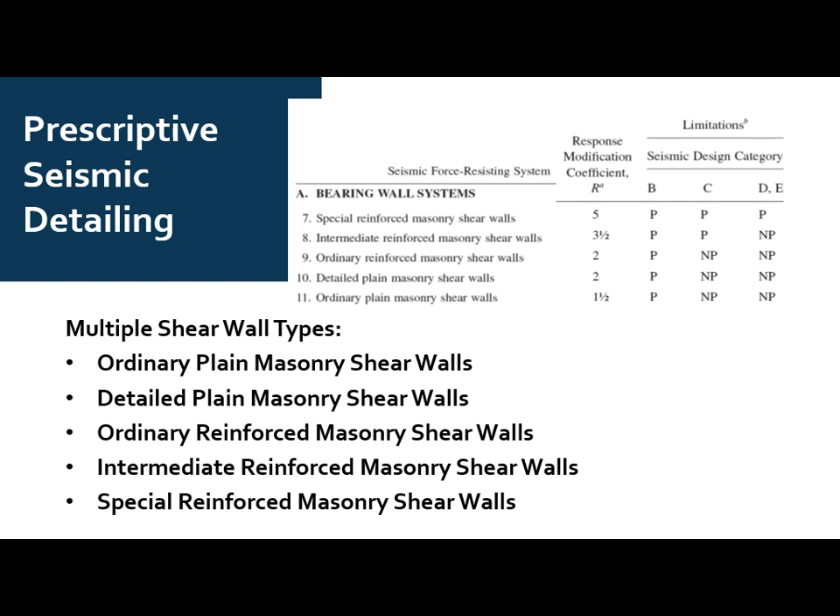Detailing requirements, prescriptive seismic detailing requirements, long story short: as we get into higher and higher seismic design categories, the code requires more and more reinforcing steel. It's really all tied to the ASCE 7 response modification factors, R, C sub D or omega factors for those different types of systems. They're all benchmarked off of the minimum reinforcing steel for an ordinary reinforced shear wall, intermediate reinforced shear wall, or special reinforced shear wall, tied back to those response modification factors and seismic coefficients we use to increase displacement or decrease design loads, assuming we get some energy dissipation out of those different reinforcement schedules.

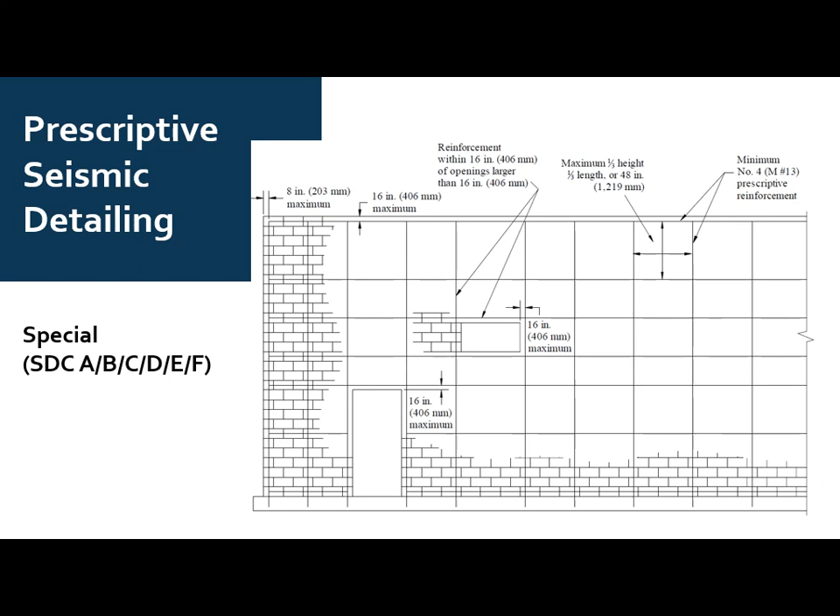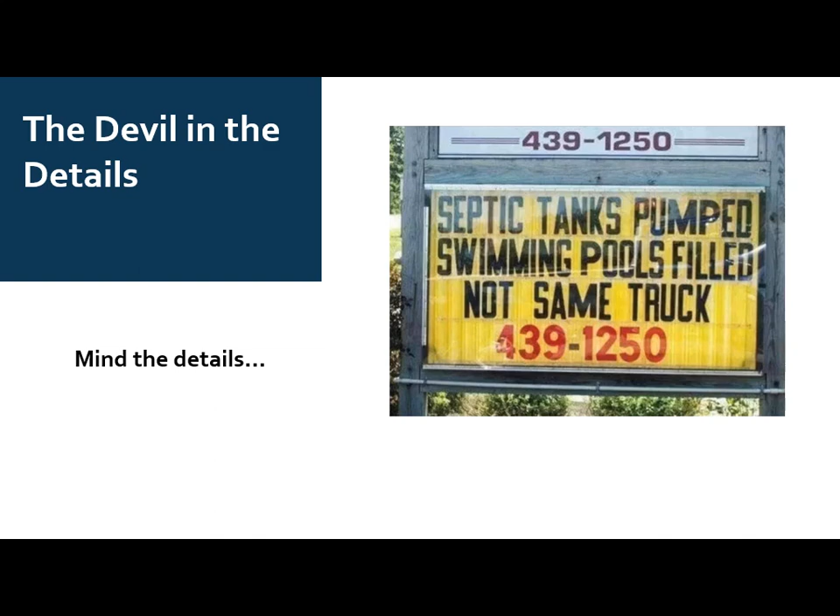So going back to where we started, minding our details is always the important thing, right? Make sure you get in the right truck. They always say that, whenever I pull up my Uber app, it's always make sure you get into the right car. Let me see if I can pull this up real quick, because I know we've got 1 more minute.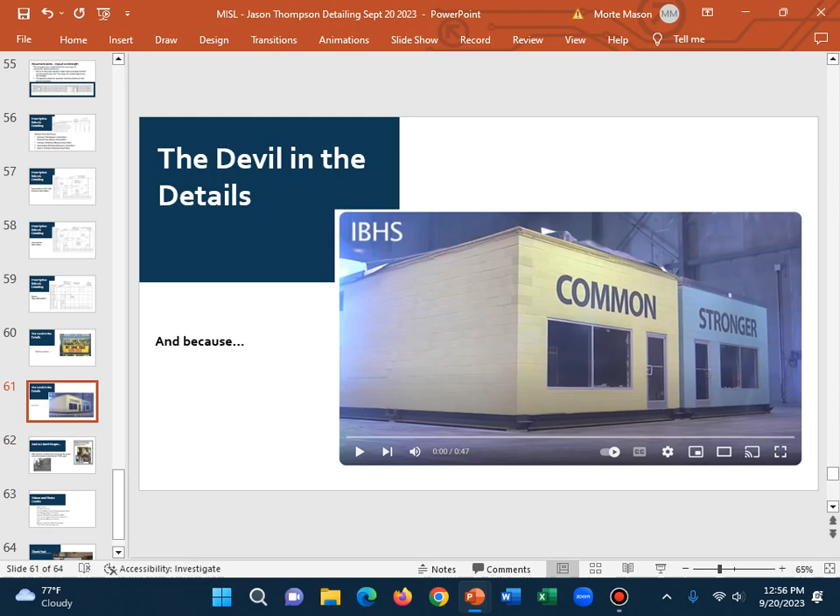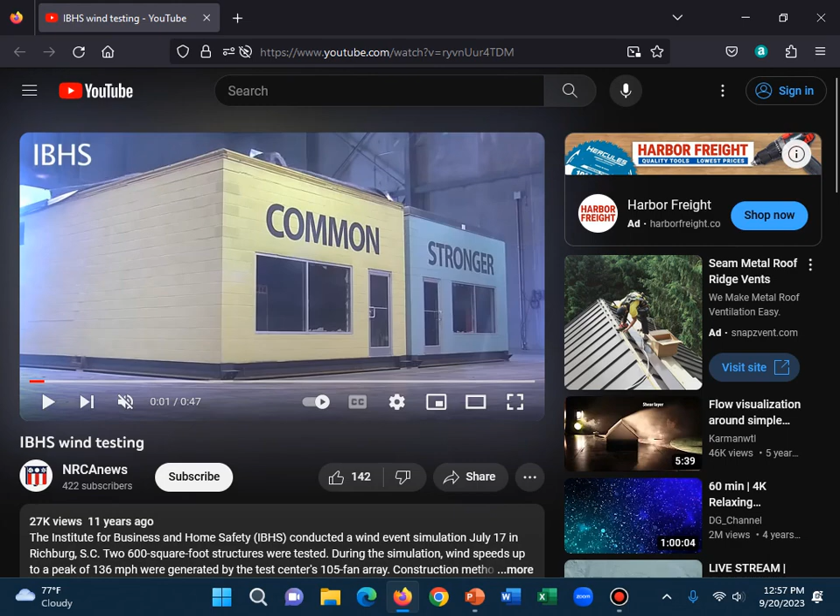As soon as it gets going here, I'm going to hit pause and give you guys a little context. I'm sure you've all seen the car crash tests, from the Institute for Highway Safety. It's actually the insurance industry that goes out and buys cars and crashes them, to try to motivate the car industry to make safer cars. They've got a similar facility down in South Carolina that does basically the same thing for buildings, called the Institute for Business and Home Safety. It's funded by the insurance industry, and they've got this massive facility that can generate hurricane force winds on full-scale structures, and throw fire at it, and do all kinds of cool things. If you guys ever get down there, it's worth a pass. It's by absolutely nothing, so I'm not sure why you'd ever be down there, but if you do find yourself driving through the backwoods of South Carolina, it's probably not too far away.

So the context on this one: obviously 2 concrete block buildings. The first one is called common, the other one called stronger. Which one do you think is stronger? The terms here are through the lens of the insurance industry. Common means common buildings that they're currently insuring, hundreds of millions of square feet of industrial block buildings built in the 40s, 50s, 60s and so on. What they wanted to illustrate is common, what's out there in the old building stock, versus stronger, which is if we design and detail it today, how do these two structures perform? Fundamentally, the big difference between these two had to do with our load path, maintaining that connection from the roof all the way down.

So I'm going to hit start here. It's not very long, only 30 or 47 seconds. You're going to see it fail, fairly quickly. Don't panic, it's going to show it again in slow motion after it wraps up.

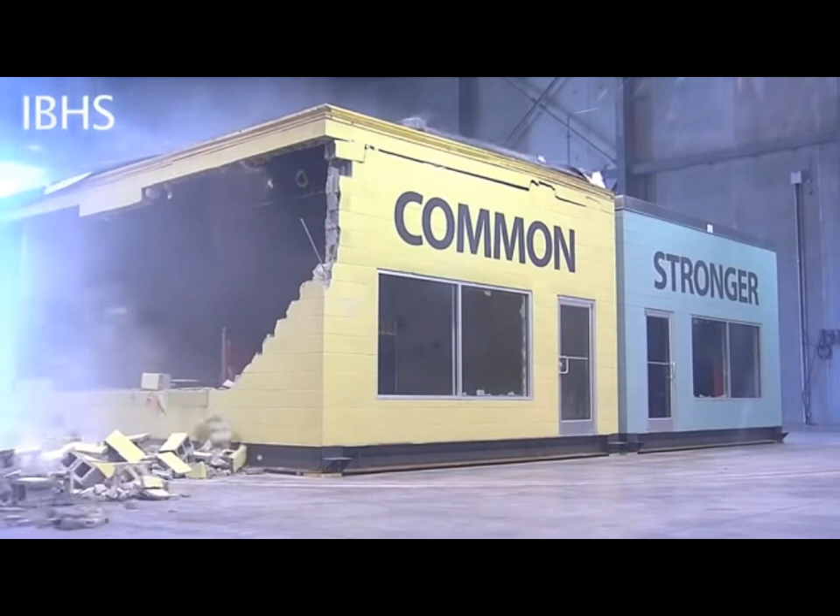But to me, I think this shows perfectly the mechanisms that cause some of our failures. What you saw here is the roof started to lift up. The only thing really holding that sidewall in place was whatever gravity load was bearing down on it from the roof. Once that was lifted up, the wall just fell out.

So this will go in slower motion. What you'll also notice, it's maybe hard to see, but the windows and door were broken out. They intentionally wanted to get wind inside the building to lift the roof up and create that mechanism. I always grew up with that wives' tale, I don't know if you've heard it, but if a big wind event's coming, open all the doors and windows, let the wind blow right through, which is the exact opposite of what you want to do. It's not how we design structures.

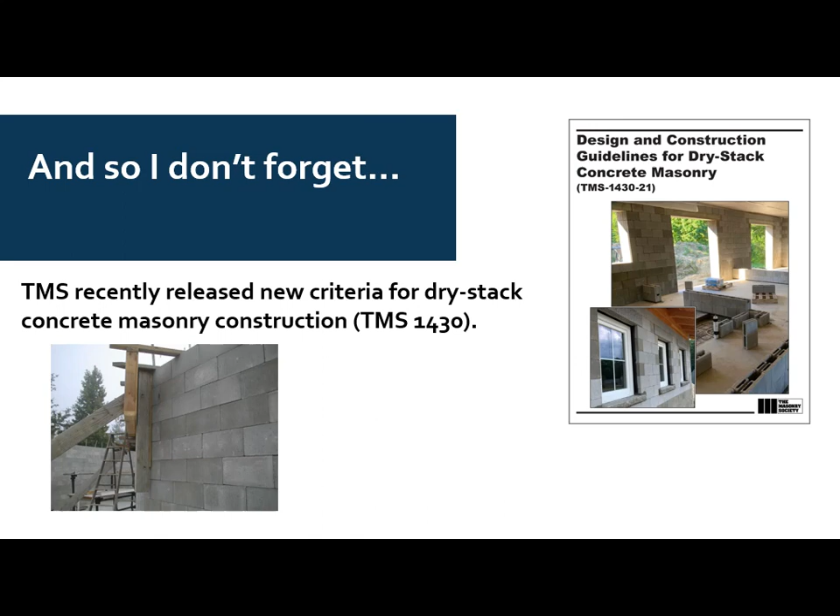So I think with that, this is my last little placeholder, it has absolutely nothing to do with details. TMS has just published a recent new publication for dry stack masonry, designed and constructed exactly like concrete masonry, just with very little mortar involved.